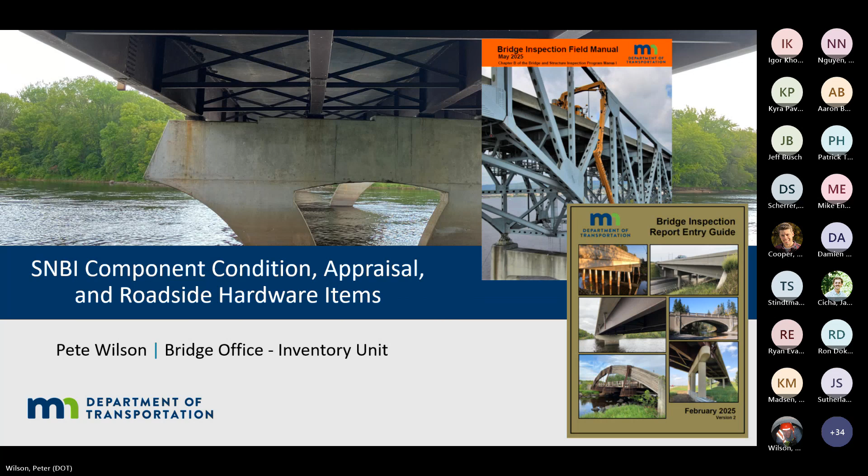So starting with the SNBI component condition ratings, obviously that's the big change this year as far as bridge inspection. We're going to be retaining the 5 original NBI ratings we've been using since the 70s, but there will be some revisions to those, and we'll go over those. In addition to those, this year with the SNBI, there are now 6 new items that have to be rated during routine inspections. So obviously a lot more work.

They won't have an initial rating, but some of them will have some notes in there, so you can use those hopefully to help you rate those items. In addition to those 6, there are these other 2 items. These items are not included in our manual. They're calculated automatically, and they'll be displayed on the inventory and inspection reports.

Essentially this is to replace an old item that was called structurally deficient in the old system. They did away with that term, and that's been replaced by just a good, fair, poor designation. That'll be displayed right on the top of your inventory inspection reports, and it's going to be based on the lowest of the main SNBI ratings, the deck, super, sub, or culvert.

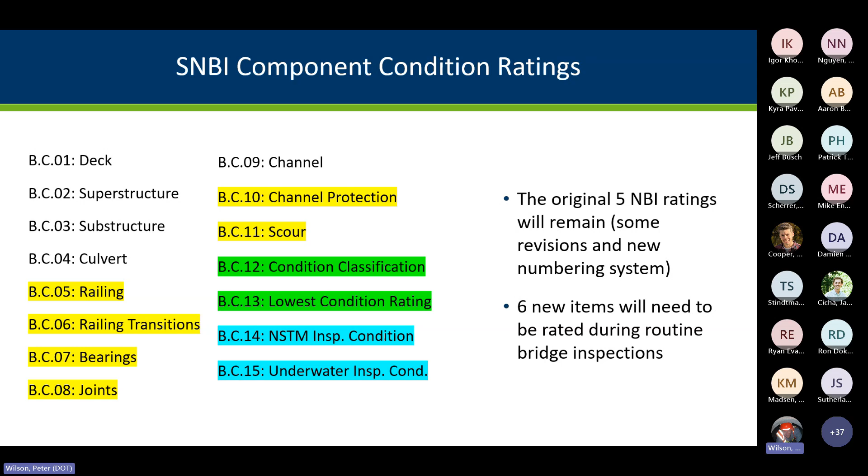And then the final items are what we call the NSTM, used to be fracture critical, and the underwater inspection condition ratings. These are included in the inspection manual, but they're not going to be rated during routine inspections. They're only done during those in-depth inspections, and those are essentially set up to establish the frequency for those inspections.

Now, if you have a bridge inspection manual, on page B8 there's a general table for the SNBI component ratings. One of the reasons Federal Highway revised these, they really wanted these component ratings to correlate better with the element condition ratings we've been using since the 90s. So they adopted a 4-level defect system that they took directly from the AASHTO Manual for Bridge Element Inspection. One of the changes, instead of using the condition state numbers, they decided to name each defect level.

This shows how they relate. The first ones are the inherent defects, and those correlate with condition state 1, and some examples would include a shrinkage crack in concrete or a rolling defect on a steel member. The next one up would be minor defects, and those correlate with condition state 2 of the elements. That's when deterioration is initiated but is not yet significant. Examples might include light leaching cracks in concrete, surface corrosion in steel, surface checks in timber.

Moving on from that is the moderate defects, and those correlate with condition state 3 in the element system. That would be a defect that is more significant than minor, but the strength of the component is not yet reduced. Some examples include, say, spalling with exposed rebar in concrete, flaking rust on steel, or decay in timber. And then finally, of course, we have the severe defects, which correlate with the condition state 4 defects in the element system. And that would include, say, severe section loss at a steel beam or crushing of a timber pile.

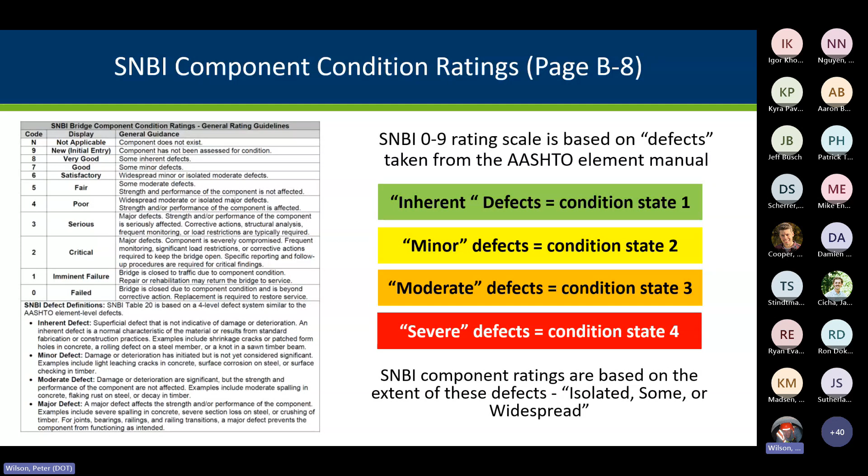In addition to that, if you also see on page B8, we also have some terminology they use to describe the extent of those defects, and that is either isolated, some, or widespread. These are obviously pretty subjective terms, and they don't define them really well in the SNBI. What they do say is that a defect is considered widespread when it is present in many separate areas, where an isolated defect would be in only one or a few locations. And then the word some is just whenever it's more than isolated and less than widespread. So again, pretty subjective and vague, but that's what they use in this table.

Anyway, if you ever looked at this SNBI manual, the component rating guidance is spread out in 20 tables over about 47 pages. We decided that was not a great way to use in the field. So what we've done is we've merged that SNBI guidance into a one-page table for each item, and kind of use the same format we've been using for several years here in our manuals. And so instead of having those 47 pages, we've knocked that down to 15 pages.

The SNBI copied those defect tables right from the AASHTO manual. And so like AASHTO, there's very detailed guidance for minor and moderate defects, the condition states 2 and 3, but very minimal guidance for inherent or major defects. So that's one thing we tried to expand a little bit, tried to give a little bit more definition of inherent and major, but we can't describe every possible defect in a one-page table. They're not perfect. So we do appreciate any feedback we can get to improve these. We'll probably be putting out another field manual in 2 years. So, as you use this, try to give us some feedback. If we don't hear from you, we'll never be able to fix it.

Another big change to the table this year is for condition state 9. That used to be just for new condition. Now it's changed to that component has not been assessed. So that's what we enter for a new bridge or for these new items as they come in. And so after you look at it, if there's not an issue, you're supposed to move those to an 8. If you've already done some entry work in SIMS, you'll realize that there's a system that will catch those, and so they won't allow you to submit that report until you change those all to a condition state 8 or lower.

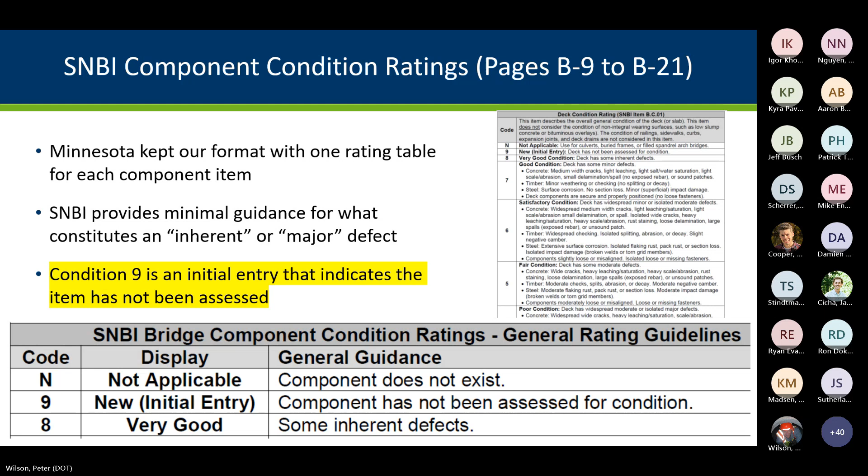Now I want to go over some of the revisions, starting with the deck condition item. The big change to this one is that in the SNBI, the deck rating does not consider the condition of non-integral wearing surfaces. That would include, say, a low slump overlay, bituminous overlay, epoxy chip seal. In our state, we've always considered that wearing surface in the condition rating. It's always been a primary consideration for rehabilitation projects, so it's not a change we liked. But just be aware of that. Also, since the SNBI doesn't have an overlay item, our wearing surface element 510 is really the only way to track the condition of overlays now.

For bare concrete decks or decks poured to finish grade, say without an overlay, that top surface condition is considered. So that does make for some confusion. There are 2 different ways you can rate these, and we have nearly 7,000 bridges with concrete decks or slabs, and so that means half of them are going to be rated one way, just by the underside, where the other half are going to be rated using both the top and bottom, depending on how those are constructed.

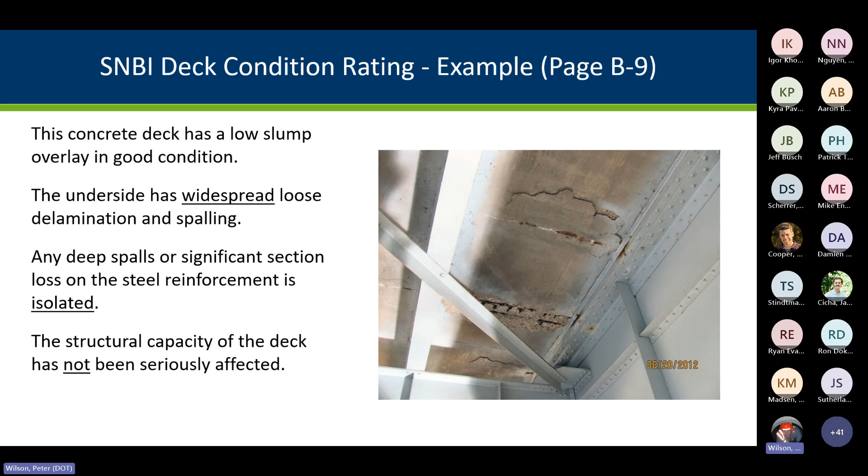And I really thought this would be an easy question, but people had a really hard time with this one. So I kind of want to run through it. So this is the way we described it. Again, we got a low slump overlay, good condition. Underside has widespread loose delamination and spalling. They mentioned that any significant section loss at steel reinforcement is isolated, and the structural capacity of the deck has not been seriously affected. Now, here's the table that we have for this.

In this case, I just included condition states 3 through 6, otherwise it gets too small in here, and I kind of limited it to the concrete defects. But if you look at this, just consider, how do you think this deck should be rated? First off, this new rating does not consider the overlay condition, so we can kind of disregard the overlay condition. We're only looking at the underside for a deck because that's a low slump overlay, so it's non-integral.

Also, since the structural capacity is not seriously reduced, we can eliminate condition state 3. So that leaves condition states 4, 5, and 6 that we want to look at here. The way we do it, spalling with exposed rebar, loose delaminations, those are considered to be moderate defects, both in our element rating tables and in this one. Whereas a deep spall or exposed reinforcement with significant section loss, those are major defects. And the way this was described, the deck has widespread moderate defects and isolated major defects.

So based on that, which one of these is the best fit? And the way we looked at it is this lines up really well with a 4. And again, we use the language right out of the manual to go with that. During our refresher training, only 58% of the people rated this a 4, which I thought was pretty low. We do give a kind of a tolerance. We give partial credit for condition states 3 or 5, but we had about 28% of the people rate this deck as a condition state 6, satisfactory, which we thought was way too high, and they received no credit.

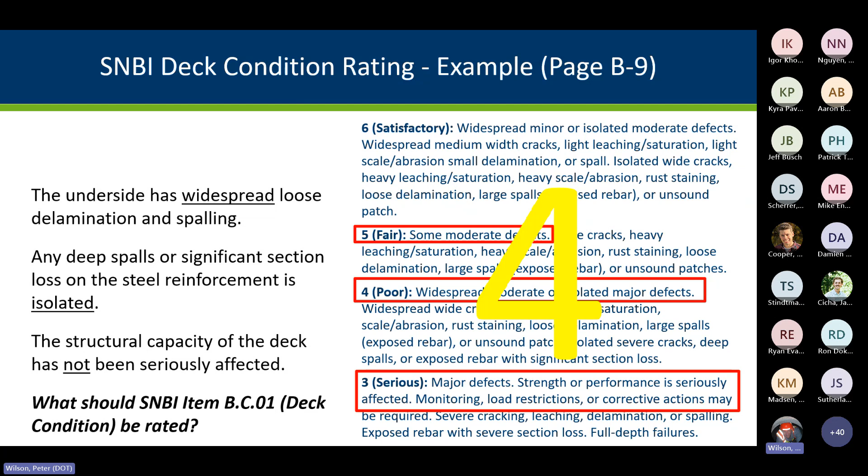Moving on, we'll just talk about the superstructure. There are a couple revisions to this that might cause a previous rating to go up or down one level. It'll be a lot easier if you have good notes explaining your NBI condition ratings. Under the SNBI, condition state 7 is no section loss on primary steel members. In our old system, I think minor section loss was a 7. So we are going to have some bridges that are going to drop from a 7 to a 6 just due to the isolated minor section loss. Hard to find a steel bridge out there that doesn't have some minor section loss on it. So that might have some impact.

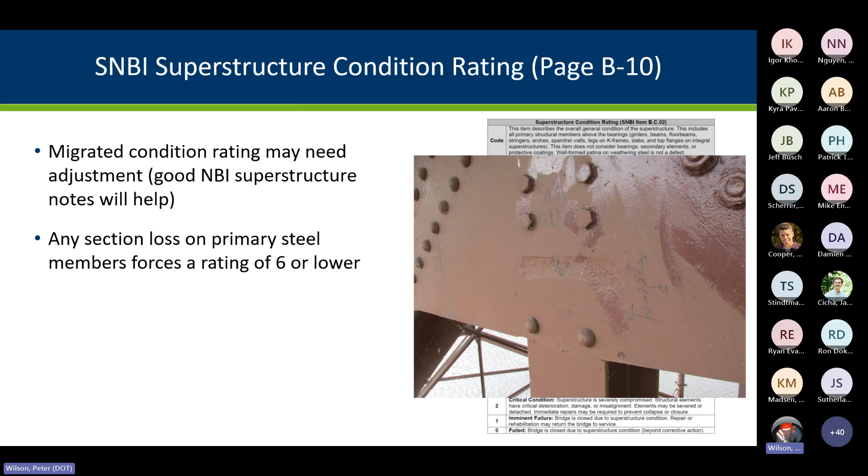Also, shear cracking. In our old manual, we had structural cracks may be present as condition state 5. That was based on the old coding guide, where the first mention of cracking was down at condition state 5. So we felt we couldn't do it higher than that. But in the new SNBI, we can allow some higher ratings for shear cracks if it's isolated or minor. So that is a change there. So if you had moved it down, you could move that back up if that's just isolated.

And the other change is for bearings. Those are now rated under a separate SNBI item. So for bearings, if you did have a superstructure that was marked down due to bearing issues that didn't impact the rest of the superstructure, you could raise that rating up.

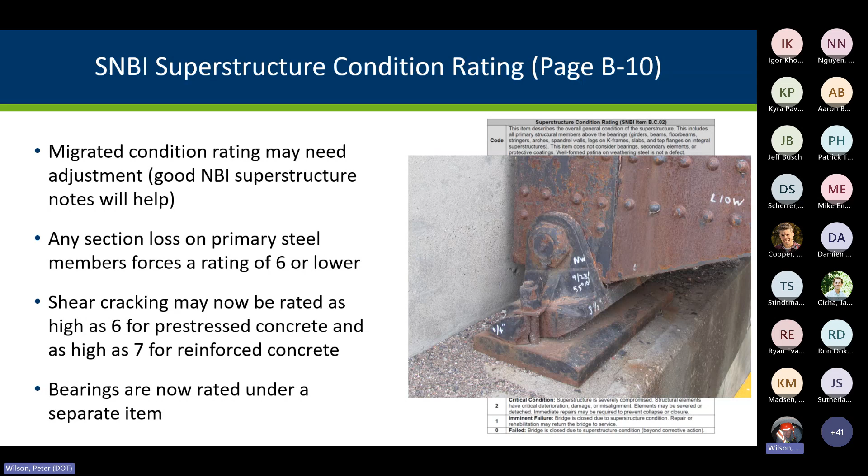And so this is another example here. This is a question from the refresher test. And again, we described it using the same verbiage right out of the table, so we hope most people get this right. We described what you see on the left of the screen, with the flaking rust along the bottom flange, significant section loss in some critical stress areas. We did make the note that the structural capacity is slightly reduced, but not seriously affected.

So looking at the table we just included, in this case I'm just showing condition states 3 through 6 from page B10. What would you rate that? There are a couple ways of looking at it. First off, looking at the defects. Flaking rust indicates some section loss. Section loss is a moderate defect.

So in this case, the superstructure has widespread moderate defects with significant section loss in some critical stress areas. So looking at that, condition state 4 probably fits that the best. We also said in here that the structural capacity is slightly reduced but not seriously affected. And that kind of rules out condition state 5, which is strength and performance are not affected.

Whereas condition state 3 also would be eliminated because there the performance is seriously affected. So again, using both criteria, it would end up with a condition state 4 for the rating. And in our test, 90% of the people did have that rated 4, which is pretty good. But I think we had 5% rate it condition state 6, satisfactory, and got no credit. So that was a little disappointing. I think people should have been a little closer on that one.

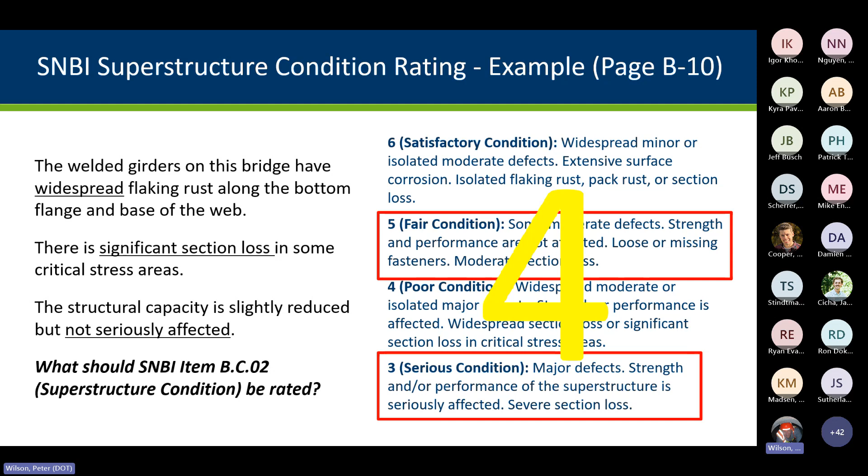Moving on to the substructure. The main revision to this is related to shear and flexure again, where we've made that same change that we did for superstructure. Structural cracking is pretty common on concrete pier caps, and with our old guidance, we had a lot of bridges that were rated down to condition 5 due to shear cracking in those caps. While this is a concern, there are instances where, if that's minor or isolated, we felt that condition state 5 would be too low, so you could raise that up in those situations.

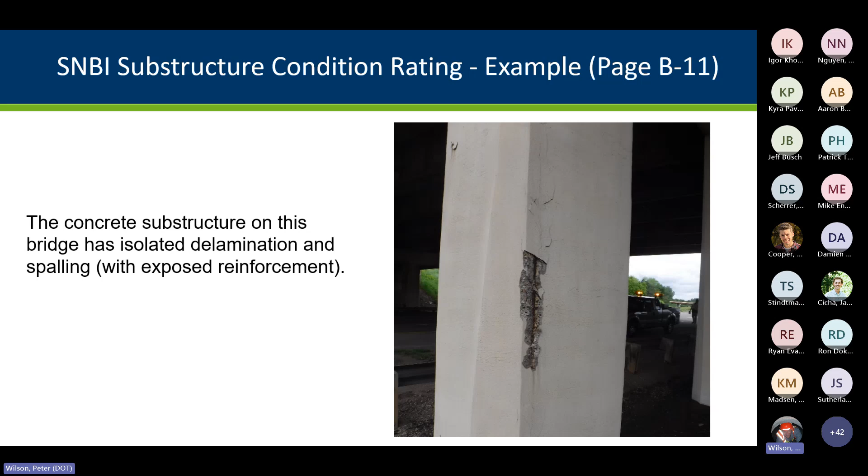And here's a rating example, again, based on our refresher test. In this case, we had just a simple statement that we had some isolated delamination and spalling with exposed reinforcement. So looking at the guidance on page B11 in the manual for substructure, it shows condition states 4, 5, 6, and 7. First off, condition state 7 says no exposed rebar. We had some exposed rebar, so we could rule that one out.

Spalling is considered to be a moderate defect. This spalling we said was isolated, so for sure we can get rid of the poor condition since it's not widespread. So we're down to the other two options, which are widespread minor or isolated moderate defects, or some moderate defects. And again, these are very subjective terms. But in this case, we said right out that it's isolated. So the answer in this case should have been a 6.

We had about 77% of inspectors rate this condition 6, but we did have some people rate this condition state 4 and get no credit. Isolated spalling, I don't think that should be knocked down to a 4 for poor condition.

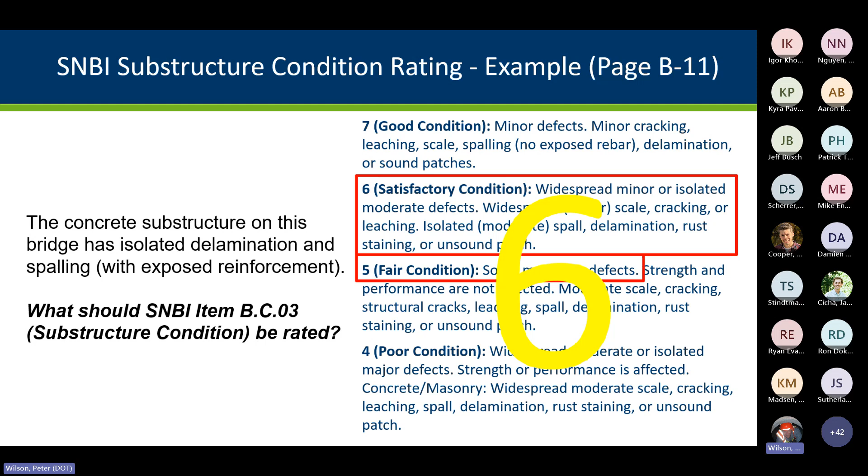Moving on to the culvert condition rating. This table is worded differently than the old table in our system, but they're close enough that migrated ratings should not need much adjustment, if any. And I also want to point out that these SNBI defects correlate really straight on with the element level defects. For instance, for a concrete culvert, the defect descriptions in the SNBI table on page B12 are going to correlate with the element ratings, and that's, I think, on page B180.

So, for instance, light leaching is a minor defect. Heavy leaching is a moderate defect. Also for spalling, a small, shallow spall without exposed rebar is going to be a minor defect. Spalling with exposed rebar is going to put you up to moderate. And if that spall is deeper than 4 inches or the rebar has severe section loss, that's going to be categorized as a severe defect.

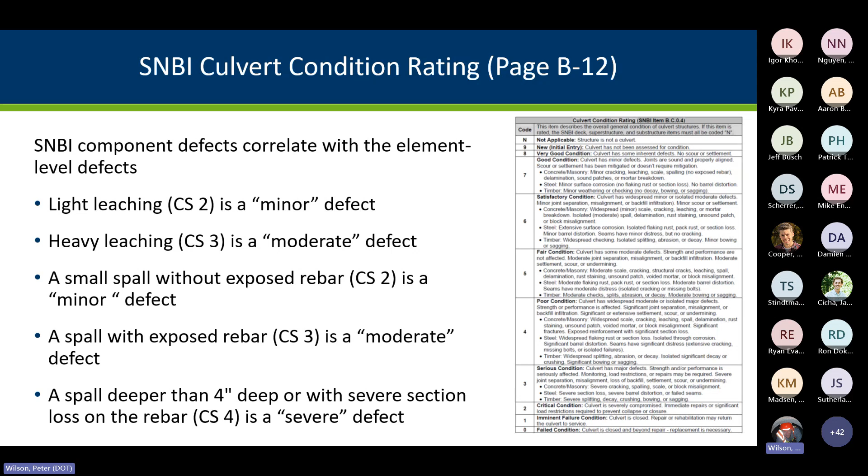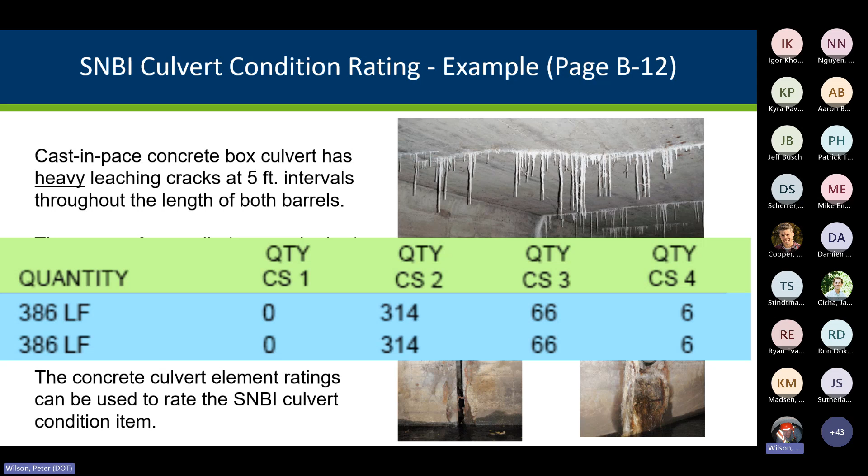And just a reminder that when you rate this culvert, you've already gone through and rated the concrete culvert element, and those should already describe the extent and severity of these defects. So if we pull up the current culvert element ratings, we have about 81% rated as CS2, minor defects, about 17% rated condition state 3, moderate defects, and a small amount, about 2%, rated CS4, major defects. In the element notes, it explains that the 6 linear feet of condition state 4 is due to spalling at joints deeper than 4 inches. So as we apply those to the culvert component rating on page B12, we can run through and look at how those are rated.

So first off, looking at the defects, based on those element ratings, we're going to have some widespread minor defects, some moderate defects, and isolated major defects. And looking at the tables, none of these are a perfect match. But since condition states 5 and 6 say no major defects, condition state 4 is probably the best answer there as far as how to rate this culvert. Again, that's based on the defects.

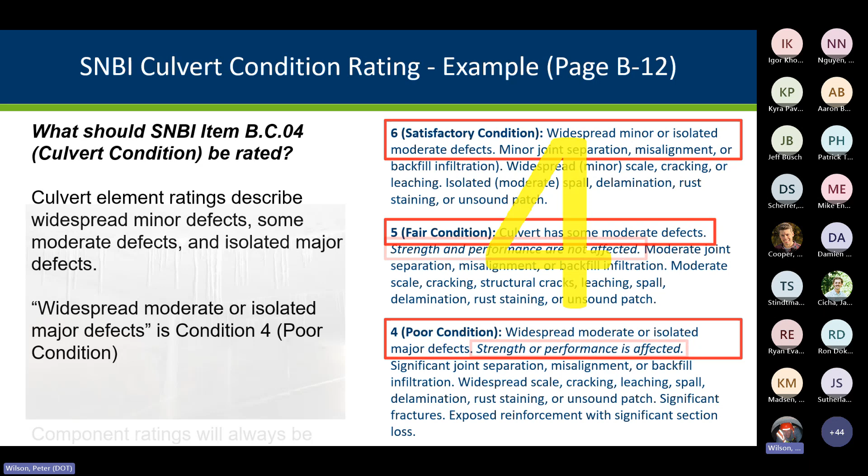Keep in mind that these tables do have other criteria just beyond the defects. One of those is strength and performance. And so again, based on the defects, 4 is the best answer there. But we also have another criteria here, and that's strength and performance. And this is why it can be kind of subjective. In this case, condition state 5 says that strength and performance are not affected. Condition state 4 says strength or performance is affected.

And in the case of this specific culvert, we had the same issue with the older tables that we used prior to this. They had kind of the same criteria as well. They have these different criteria, but they don't really say which one should govern. And so, lowering an NBI rating from a 5 to a 4 has a lot of impacts on your BPI, LPI, the inspection interval, things like that. So people are kind of hesitant sometimes to drop something from a 5 to a 4, or they maybe want to raise it from a 4 to a 5.

In this case, the inspectors back in 2019 lowered this culvert rating to a condition state 4. And then during the subsequent inspection 2 years later, the PA reviewed it and determined that the structural capacity of the culvert was not reduced. And in that case, they decided to raise it up to a 5 the following inspection. And that is one of the reasons we do allow a tolerance of plus or minus 1 for component ratings. So there is some subjectivity to it.

Just to point out that in the proposed metrics, Federal Highway is saying they're not going to allow any tolerance between conditions 4 and 5. And I think that's totally unrealistic. But it's also why it's important to have really good notes to explain your component ratings, especially when they start to get lower down in the system. In the case of this culvert, they had excellent notes to explain why they'd adjust that rating up from a 4 to a 5. And in this case, I would say that either of those, depending on which you use, would be correct, 4 or 5. And that's again why we have that tolerance we allow.

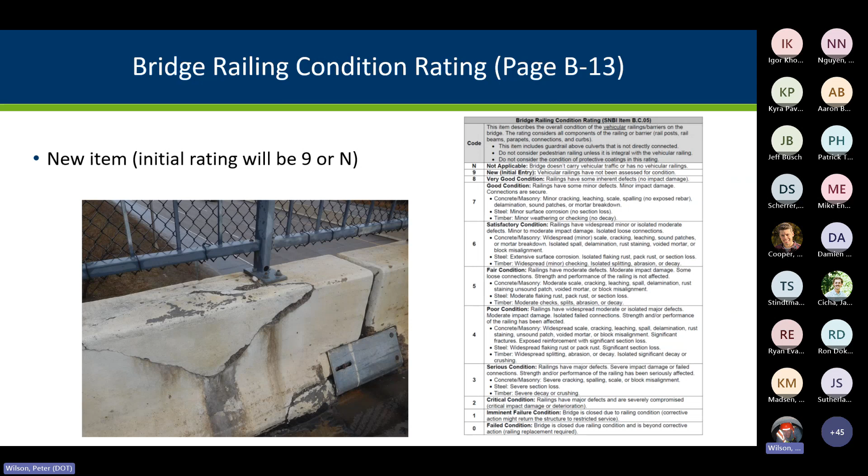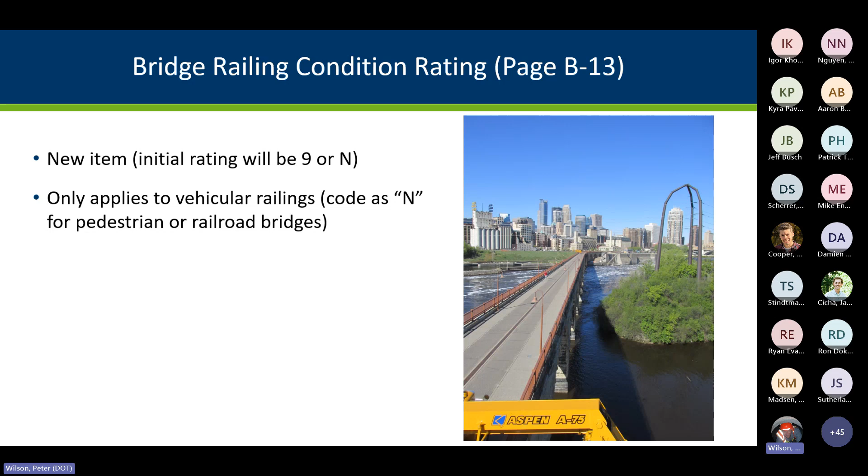If you have a railing like this, where there's a concrete barrier with a steel railing mounted at the top, where the steel railing is really more for pedestrians, since those are integral and tied together, you would consider the damage to that upper railing in this rating. You do not consider the condition of protective coatings. Corrosion can mark it down, but just fading or chalking or peeling of a paint layer or galvanizing is not going to impact that rating. And this does not impact your inspection intervals. So if it does get dropped down really low, it's not going to force you into a 12-month inspection interval.

So here's kind of a rating. This is actually from Scott Tyson's presentation at the training this year. This bridge has its original railings from back from 1966. This is what we call our MnDOT rail type 14. It's a one-line concrete base that has a two-line upper steel pipe. There's also a tension cable that runs kind of below the horizontal concrete there that goes through the rail posts that ties everything together.

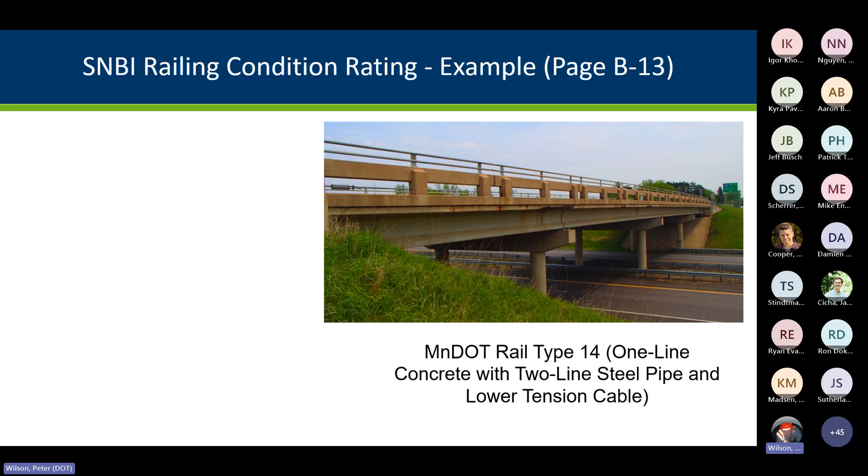Keep in mind that this new coding item doesn't have any sort of migrated railing or notes, but the railing condition has always been documented and rated under the railing element, so you can look at your notes and your ratings for that element when you're rating this item. It can help ballpark you in. There wasn't a way for us to do this automatically because it was just too messy with the multiple elements you might have, but you can at least take a look at those.

Combination railings are rated under more than one rail element. In this case, it's concrete and steel, so you have a concrete element, and these are the concrete ratings. We can see we're mainly condition state 2 with about 10% at condition state 3, with nothing rated condition state 4. The steel portions of the railing are in better shape, and these are the current element ratings for the steel element, mainly condition state 1 with a little condition state 2.

Based on those element ratings, you could say that we've got some moderate defects with a condition state 3. So because of that, if you look at the SNBI rating, I think if you have moderate defects, it has to be rated condition state 6 or lower. So as we go through the rating here, we'll only look at 6 or less.

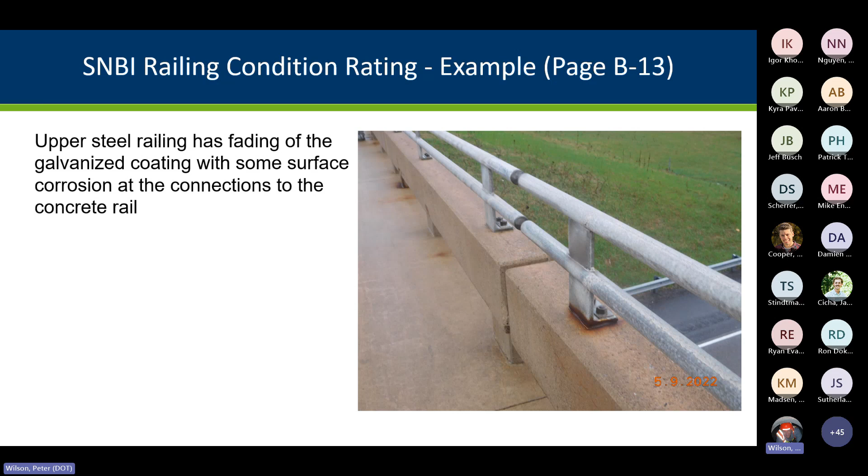But anyway, here's some photos of the railing. The upper pipes have some fading of the galvanized coating, but we don't consider that in this rating. We're only concerned about corrosion or section loss. And you can see there's some surface corrosion maybe down at these connections, but nothing really significant. The lower tension cable has some coating failure and surface corrosion, but again, nothing that would rate it down to a 3 or lower.

The concrete posts and beams have some map cracking, rust stains, and spalls with exposed reinforcement. It's kind of a subjective thing, but we said that the spalling is not severe and does not yet impact the strength of the railing. So looking at condition states 4, 5, and 6, here are the codes that come from page B13. We have no major defect on this railing, and the strength of the railing has not been reduced. So that probably rules out condition state 4, but we still need to look at the extent of those moderate defects.

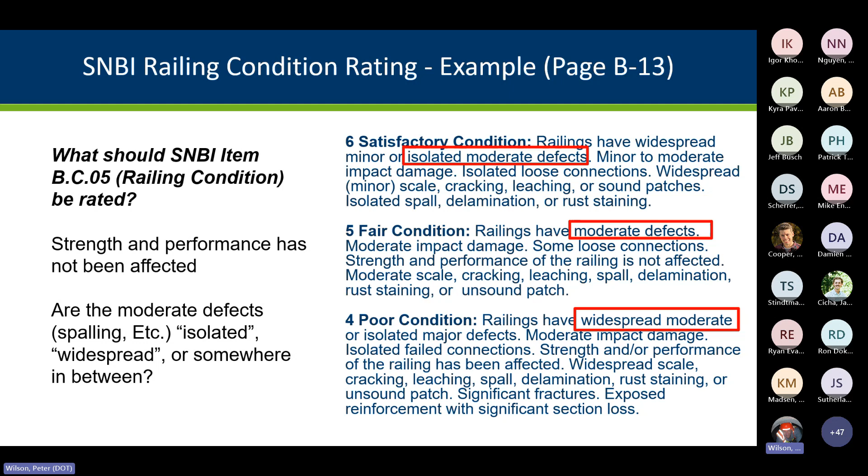So looking at those, condition state 6 is isolated moderate defects, 5 is moderate defects, and 4 is widespread moderate defects. This concrete railing had about 10% rated 3 due to spalling and other defects. I would not consider that necessarily to be widespread, but I think it's more than isolated. So Scott and I both thought that a condition state 5 was probably the appropriate rating for this railing.

Another new item that we have this year is the railing transition rating. This is a brand new item we've never rated under an element or anything else before. On a typical bridge, this will include the end post and about 20 to 25 feet of guardrail at all 4 corners. In this case, it's kind of hard to tell where it stops. It's probably going to go to the end of that approach panel where that lower rub rail goes. This does not include the terminals or anything beyond that transition zone, but it will include the post and the connection.

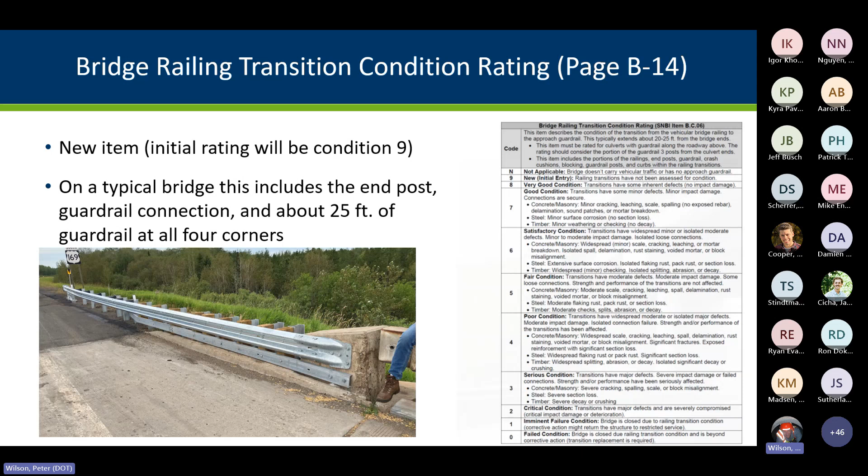Just want to point out this item only applies to the railings on the bridge, not transitions protecting the substructure. If you do have damage down below to this guardrail, we have guardrail element 893 you could use for that. Again, this only applies to vehicular railing transitions, so it's going to be coded N for pedestrian and railroad bridges. And if there's no approach guardrail at all, you're just going to code this as N.

And this was actually kind of a trick question on the training test. We had that on there: what should this be rated? And of course, it should be N. I think about 6% of the people actually provided a rating for it, even though it doesn't exist.

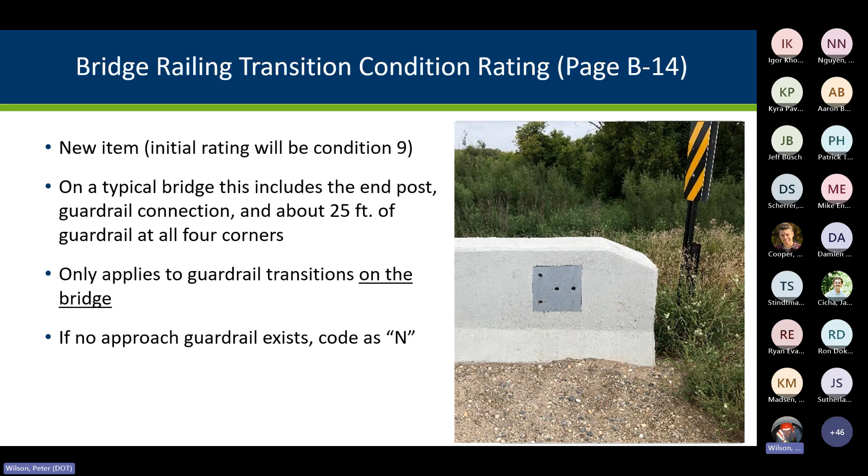And again, this one does not impact inspection intervals. So even if you have some severe conditions on there, it's not going to knock down your required routine inspection interval. So here's a rating example for this.

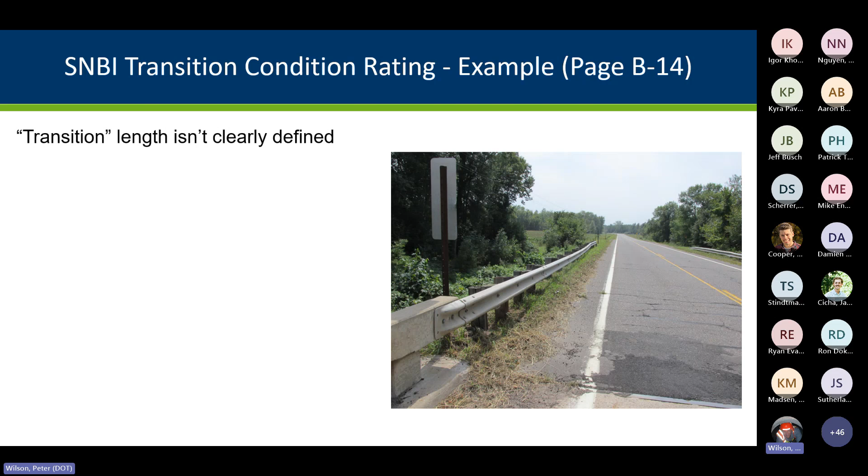In this particular one, the limits of the transition area are not really clearly defined. Like again, we estimate about 20 to 25 feet from the end of the bridge. You could look at your notes for element 893 guardrail, but that rating's probably not going to help you because that's just a one each item, and you don't know if that was rated down for things beyond the range of that transition zone.

Here are some close-up photos of this particular transition. This was a bridge that was constructed back in the 60s, but the approach guardrail wasn't installed till 1983. So by then we're using a totally different connection. We were using a 4-bolt connection, whereas the existing railing only had spaces for 2 bolts. But the bolts are in there, they're in good condition. So this item doesn't rate the adequacy, only the condition. So as long as the bolts are intact, that condition is okay.

We got some fading of the galvanized coating here. You can also see some minor plow scrapes in the plate, which isn't really considered. But in this case, any significant damage to the plate beam is beyond the transition zone. The other components we want to look at are the posts. In this case, we have at least 2 posts that are totally rotted away within the transition zone. You can see they're pretty well rotted and pretty well non-existent at this point.

So here are the coding options for this item. And again, we kind of just included the timber stuff on here because that's where we saw the biggest problems with this transition. And so where would you rate this at? For the decay on these timber posts, you have some choices of moderate, significant, or severe, and we went with severe for this one, which would go with the condition state 3.

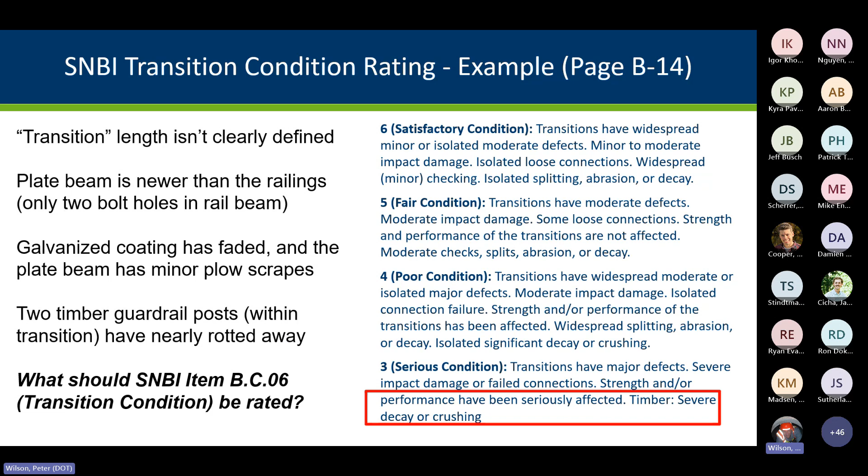If you call this significant and rated it condition state 4, I would have a hard time proving you wrong. But again, that's why your inspection notes are really critical for these new items. So we went with a 3 for this one.

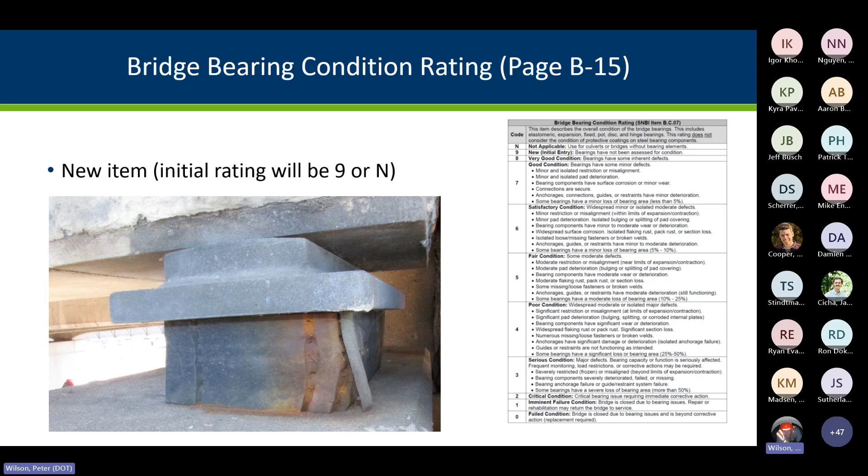Moving on, bearings now have their own component rating. We mentioned that earlier. The initial coding will be a 9 for this one. So you again have to determine what that coding should be. We have a lot of newer bridges with integral abutments where those bearings are fully encased and closed. In this case, we don't even have a bearing element. If you don't have bearings, you don't have a bearing element, you just code this as an N. Obviously for culverts, you're going to be coding this as N.

The Federal Highway does want the condition of hinge bearings, cantilever hinge bearings, to be included with this. We have at least 200 or 300 bridges, I think, in the state that have those. So keeping that in mind, those should be included. We don't consider protective coatings, just if there's corrosion or anything else on those bearings. And again, just like the other ones, this will not impact your inspection intervals for your routine inspections.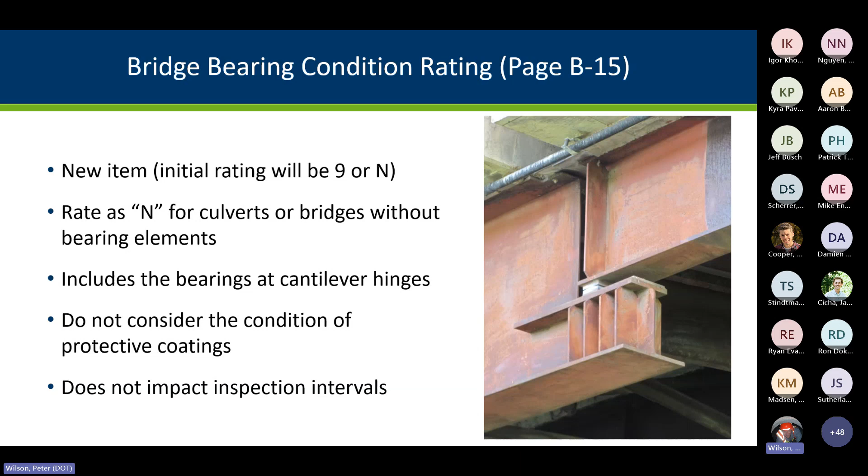And here's a rating example for this new bearing component. Elastomeric pads are generally easier to maintain than those older rocker bearings or sliding plate bearings, but one issue they do have is a tendency to walk out below the upper plate. On some of the newer ones, we put in some restraints around the edge of that upper plate to try to keep those from walking out, but you'll run across this once in a while where that pad moves out.

And here's the guidance for the bearing element for condition states 3, 4, and 5. The SNBI has very specific guidance for the loss of bearing area, and we included that in our tables. So in this case, it's based basically upon that percentage of loss of bearing area. Since we have some bearings with a loss of 30 to 40%, that correlates with condition state 4 for that item. It'll be interesting to see how this works if we run across a lot of these. So again, we appreciate feedback as you're going out and rating these new items.

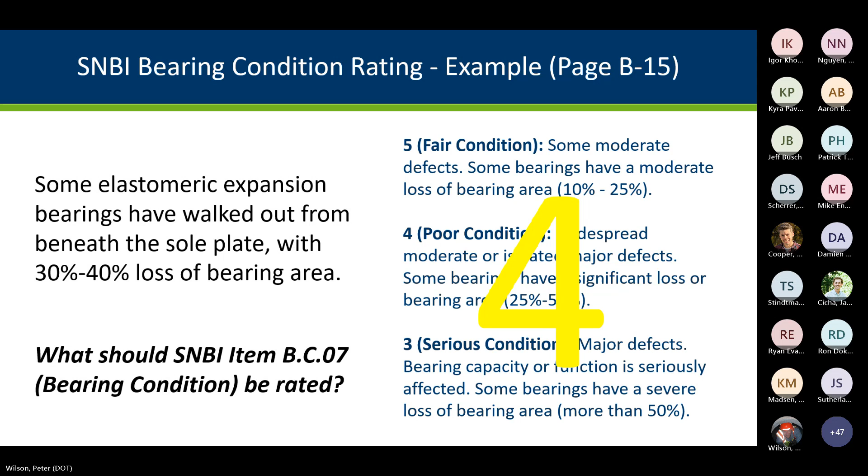The joint condition rating is also a new item and will be migrated in with a rating of 9.

One thing about this is that the SNBI, they do not want to consider the condition of poured joints that are not designed to accommodate expansion or contraction. And the vast majority of the poured joints on our bridge decks are not really designed. They're more like maybe a saw and seal joint, maybe along a center line or an end block, things like that. So a lot of our joints are not going to be considered in that if they're just that type of a saw and seal joint.

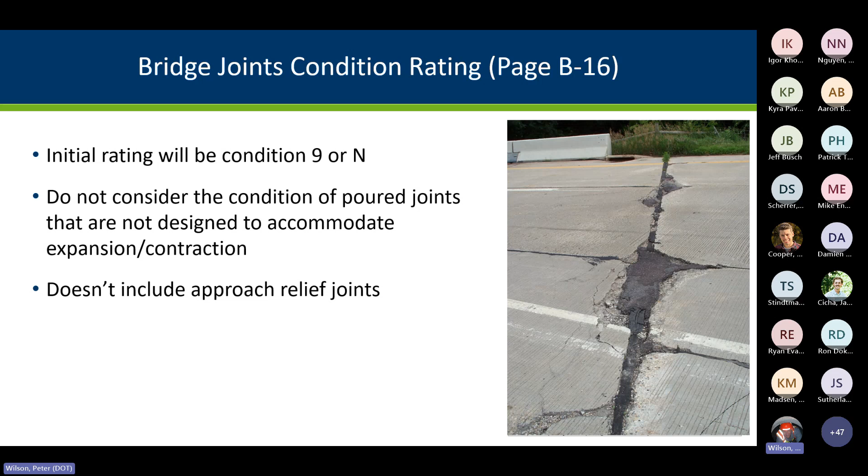Also, this does not include approach relief joints. It only includes joints that are actually on the bridge deck or right where the bridge deck ends. And in our rating system, we kind of set this up so it would identify joints that are leaking. So if you have a leakage issue, this item will be rated either 5, 3, or 1. So it kind of cuts down your rating options for those. But we really wanted to specifically identify joints that were leaking.

So here's a rating example. This is a strip seal expansion joint. In this case, it's kind of opened up, so it's nearly at the design limits. However, the gland is pulled tight, but it's still seated in the extrusion. It hasn't pulled out at all. And the joint is not leaking.

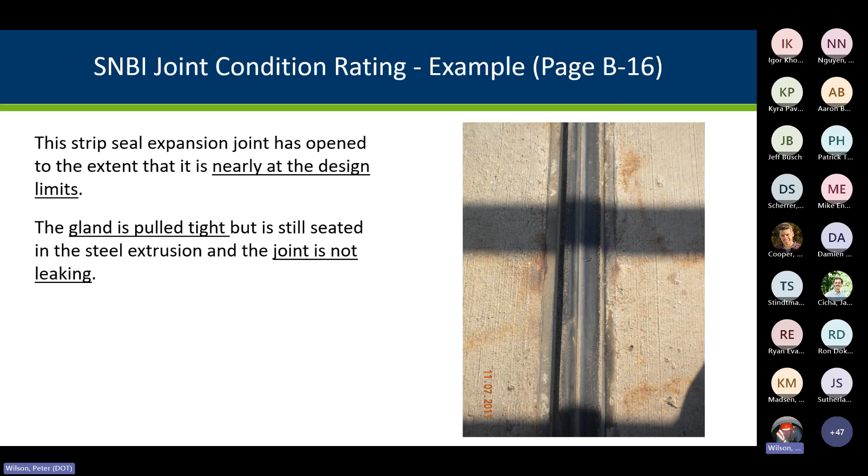So looking at the table here, and this is on page B16, we can see that since it's not leaking, we don't want to go with a 1, 3, or 5. So I only showed 2, 4, or 6. So what would be the best one for that? Now, again, the gland is pulled tight, but it hasn't pulled enough that it's actually pulled apart. So we were thinking probably the best option would be that the gaps are near the design limits. So that would lead to a condition state 4 rating for that joint.

Now moving on, the channel item, we still have this, but there are now 3 waterway items that we have to rate in addition to the channel. We'll get to those after we do this one. Anyway, this one should migrate directly and accurately from the old item. If the conditions haven't changed and your old rating was accurate, you shouldn't have to adjust it much. And those channel notes will carry over if you had any channel notes.

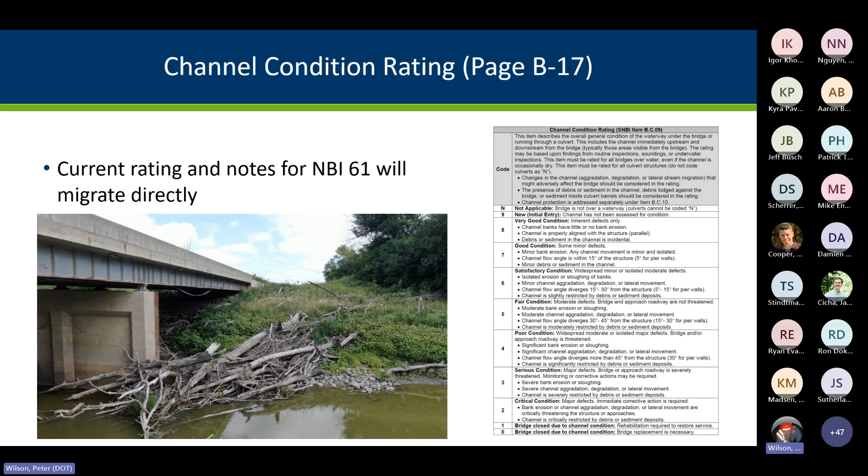Like before, this rating considers the condition of the channel right at the bridge, below the bridge, as well as upstream and downstream of the bridge. Generally, we say as far as visible from the bridge, you want to consider that in your rating.

One thing we've had added to the table is some guidance that's right out of the SNBI regarding the angle at which the channel hits the substructure. We've had some mixed feedback on this so far. Some people like this, some people do not like it. They think it's going to make the ratings harder and maybe more inaccurate. So we again appreciate feedback and opinions on this. So we'll see if we keep that in there or not. But again, we had some mixed reactions on that new guidance.

Oh, I just want to point out this item does impact routine and underwater inspection intervals. So if it does drop down, I think bridges must be 5 or higher for a 24-month routine interval, and culverts must be 6 or higher for a 48-month inspection interval.

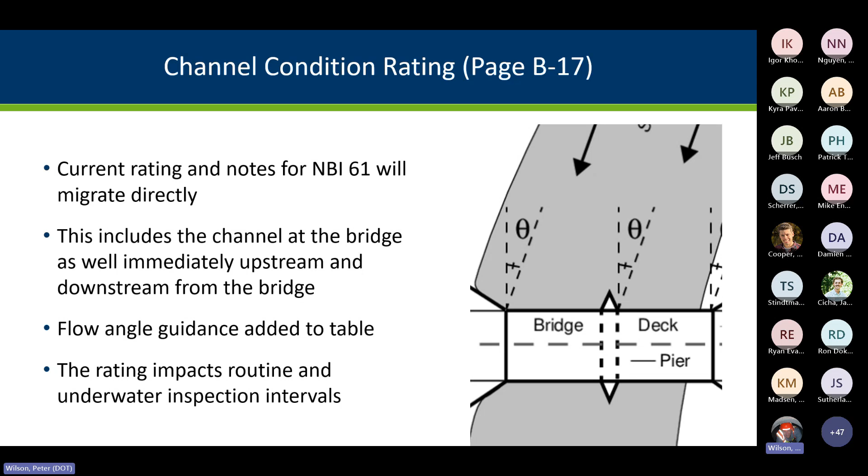So here's our rating example. This is another one that was right out of the refresher training. The table that's right in the SNBI for this item was kind of sparse, so we tried to add some more guidance, but the language is still pretty subjective, and there are a lot of things in there, and it's hard to say sometimes which guidance should govern. But we do appreciate feedback. We might be revising our table in the future.

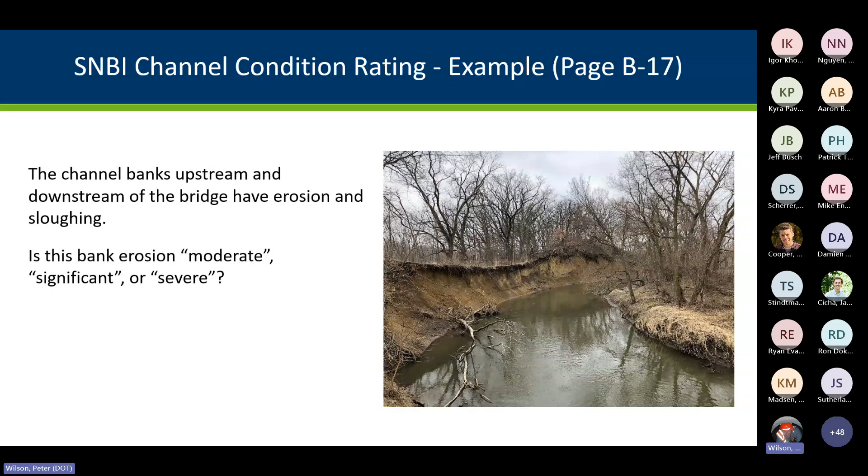So looking at this, it's going to be based on very generic terms like moderate, significant, severe. So different inspectors might look at this and give a different rating for how severe they think that bank erosion is. So again, there's our table there. Now, based solely on this, we also added this statement that assumes that the bridge and approach are not threatened. And so that's something we can use in the coding.

So that might lead you towards a slightly higher rating than if you just base it solely on that. So in this case, we did go with a 5 for this one. And I think about 88% of inspectors came up with that same rating, but all 100% of the people, I think, were within that plus or minus tolerance of 1. So even though these tables are a little bit subjective, with that tolerance, we get really close on those.

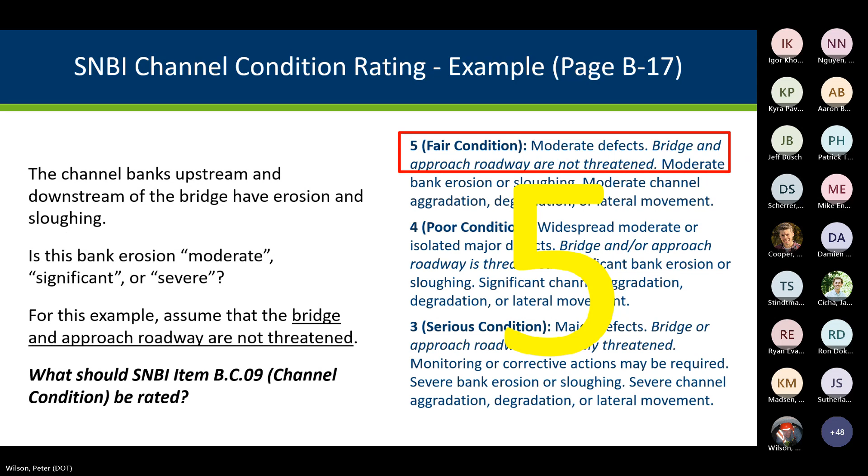Moving on, there are now 2 additional changes. One of those is channel ratings for channels, and one of those is this channel protection item that they want the protection rated separately from the channel. So obviously there is going to be some overlap between this item and the channel item. There's also going to be overlap between this and the MnDOT slope element. This will come in migrated as a 9 or an N.

But for the most part, this item should include any sort of channel or slope protection located at or below what you consider to be the high water elevation for that bridge. So wherever that highest flood level would get, any protection within that area should be rated under this item. Again, there'll be no notes coming in for that. A lot of times we don't have a lot of very good notes for the channel anyway.

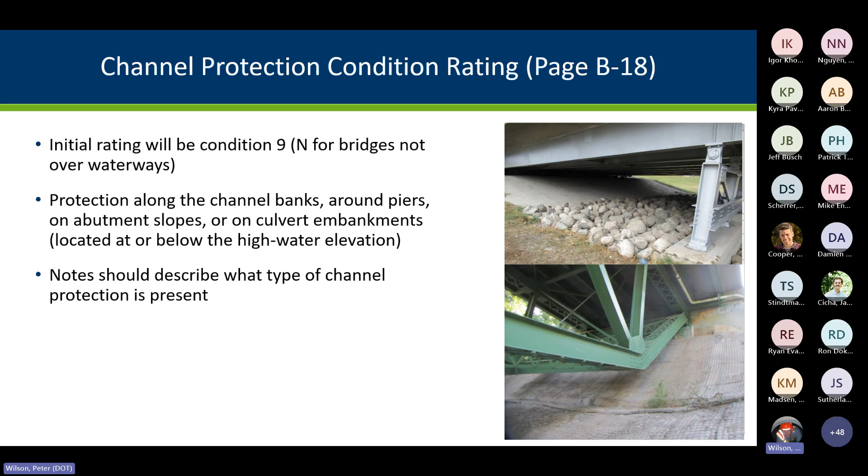So it's really important for you to get out there and at least describe the type of channel or slope protection that's present. It's a good idea, it's something you can compare to see what's shown in the original plans. For culverts, keep in mind for this item, they must be rated 6 or higher to keep that 48-month inspection interval. So if you do rate this down, you might lose that 48-month cycle. You might go back to the 24, the 2-year cycle for those culverts.

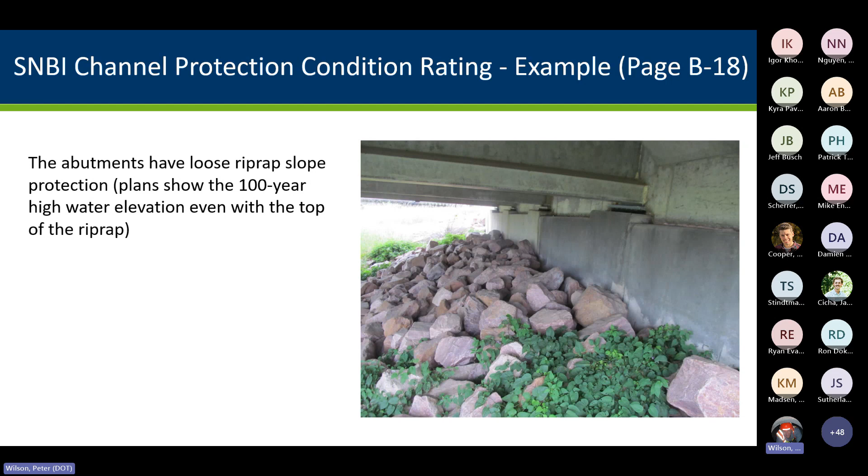So here's kind of an example here. This is a bridge that's about 20 years old. The plans show the high water elevation even at the top of the slope. So all this riprap should be considered in the rating of this item. All the riprap appears to be in place, but in some locations here, you can see where that riprap has settled maybe slightly from where it originally was placed. You can see from where the special surface treatment was put on initially when that bridge was first constructed.

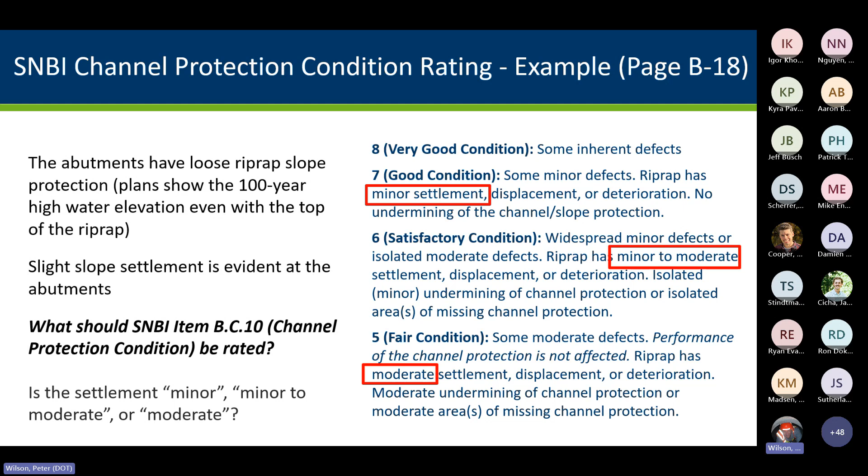So looking at the condition ratings here, we just included condition states 5, 6, 7, and 8. And so looking at this, we do have some settlement here. Would you call that settlement minor, inherent, moderate, minor to moderate? Again, rather subjective terms, but in this case, we felt that minor was probably the best way to describe it. So we went with the condition state 7 for this one.

And the final new SNBI condition item that we have to rate during routine inspections is the scour item. This must be rated for all bridges over water. This includes culverts. We used to have an old scour item that didn't include culverts, but you do have to rate it for all culvert structures.

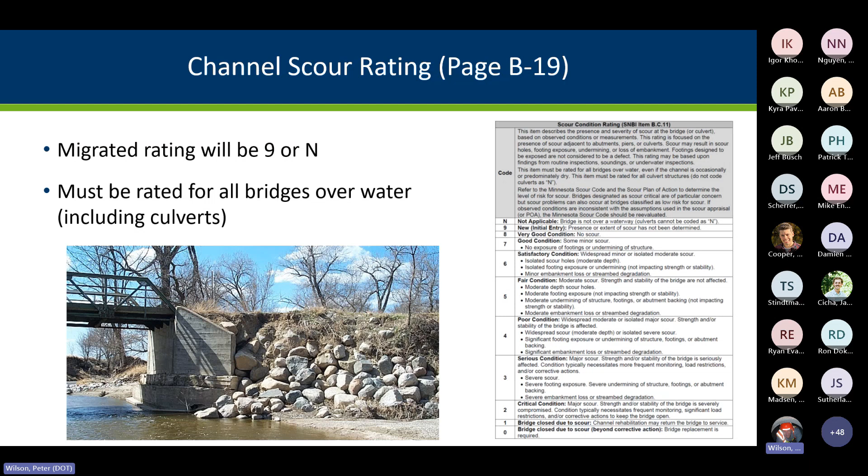Again, element 885 scour is no longer being used. We haven't deleted it from all the reports. It's still in there. So the notes should hopefully migrate that over. But once you rate this new item, you can go ahead and delete element 885 from your inspection report. We'll probably have to go through after the next round of inspections and start deleting that one out. But that one will eventually disappear as soon as we get that deleted, either from the inspectors or from our unit doing it.

Keep in mind that for this item, a rating of 3 will impact both routine and underwater inspection intervals. So if it does get really bad, that will knock those down. And also keep in mind, if your bridge has had an underwater inspection within the last year, because we started last year at this time rating these three waterway items as part of those underwater inspections, these items might already have been rated for you.

So you're just going to have to look at them and see if anything's changed since that last rating. I probably wouldn't change the scour rating from what the underwater inspection says unless conditions have really worsened or scour countermeasures maybe have been installed to correct a problem.

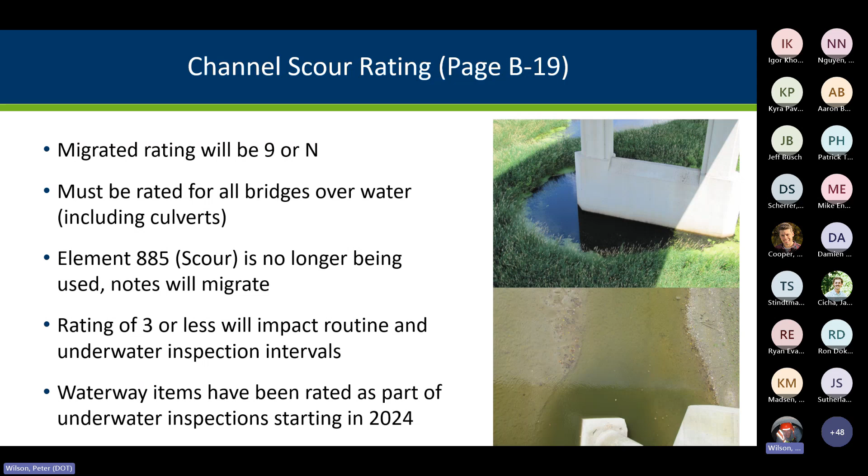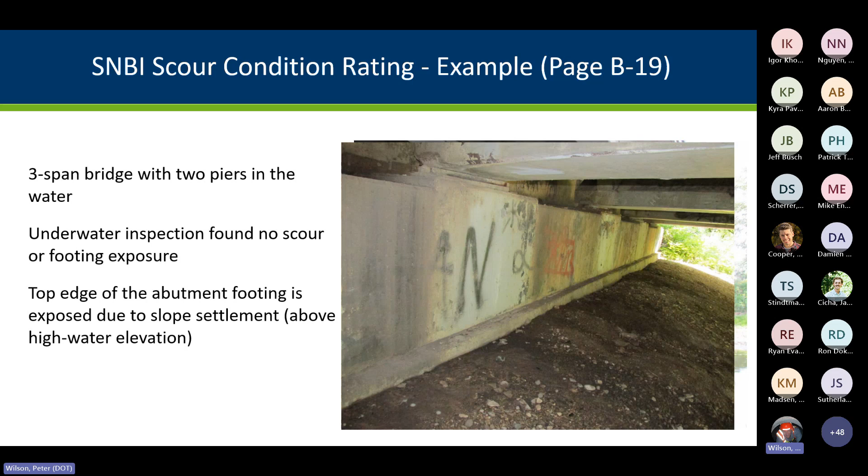So here's some condition ratings from the table from B-19. Here we included condition states 5 up through 8. And keep in mind the rating cannot be left at 9. You do have to rate that lower. Now in this case, we went with a condition state 8 because there really wasn't any observed scour that would constitute rating it lower than that. Again, what we saw up there in the abutment was really not due to that, so we

took that out. Bridge scour, the way it's defined, is the erosion of stream bed material or bank material around piers and abutments due to flowing water. If you're being really picky, you could almost argue that no bridge over water should be coded as 8, no scour, because you might have a little bit, but again, we felt in this case it was so negligible that we left it at a condition state 8.

Now, before we move on to some other items, I just want to summarize the impact of these SNBI component ratings on other items. In Minnesota, we've always considered an NBI deck, super, sub, or culvert item rated as condition 2 to be a critical finding. The NBIS has now made this official, but they've also included a couple of new items. They've included the scour and the NSTM or fracture critical item also. So you could conceivably have a critical finding on some other component, but these are the only ones that we're going to query and will automatically consider to be a critical finding if you have any of these items rated 2 or less.

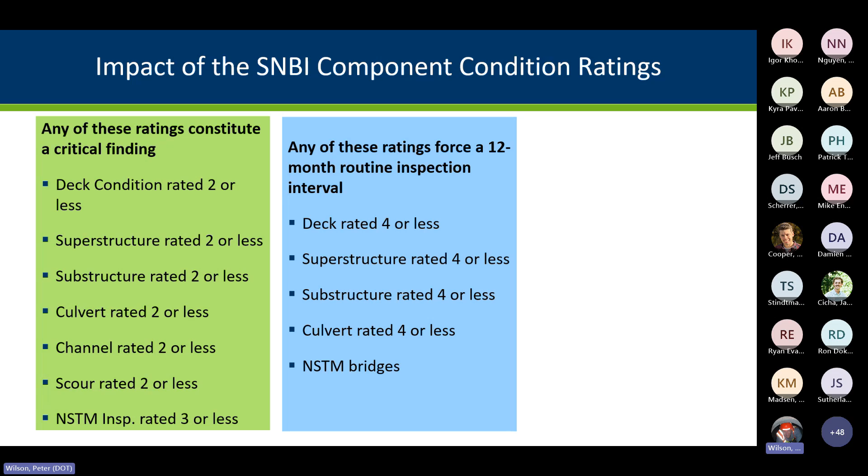For 12-month inspection cycles, we've always required a 12-month inspection cycle if an NBI rating was rated 4 or less. The NBIS did not tie inspection intervals to condition until the last revision. But they did now create rules for this. They actually have a slightly different one. They say anything that's 3 or less, but we decided to keep our stricter requirement of condition state 4 or less. We still have a requirement for a 12-month inspection interval for NSTM bridges, regardless of condition. The new item that comes through with the NBIS is that scour item we mentioned earlier. If that one is rated 3 or less, that will force a 12-month inspection interval.

And then the other one is the 24 and 48 month. For a 48-month inspection for culverts, the culvert has to be rated 6 or higher, channel has to be 6 or higher, and channel protection needs to be 6 or higher. And also the scour item. So if any of those items drop, you're going to lose that 48-month cycle that you have for culverts. In our state, we do limit this so only culvert structures can qualify for that 48-month, and that's in our state statute, so we can't include other structures at this point until we revise

our state statute. And the other thing I want to point out is that the channel protection item of 5 or less is only going to apply to NBIS structures. So if you have smaller culverts in that 10 to 20 range, that won't impact that 48-month cycle.

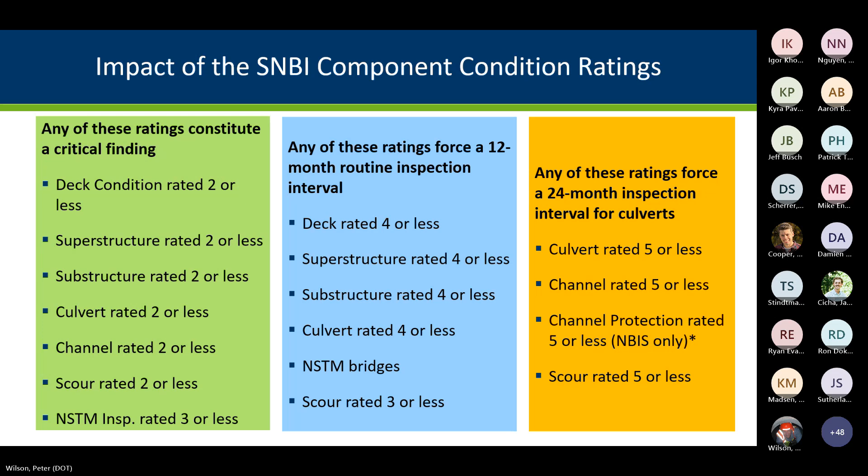I just want to talk briefly about the new appraisal ratings. These are ratings that we do want you to review during your next inspection cycle. Once they're reviewed and rated, they should rarely change. The first one is the approach appraisal rating. This replaces the old NBI item 70. It has a simple good, fair, poor rating instead of the old 0 to 9 scale. We will migrate a good, fair, poor rating based on that 0 to 9 scale, but it's only going to be as accurate as the old rating was.

This only applies to vehicular roadways and only applies to the roadway above a bridge or culvert. So if you have a pedestrian or railroad bridge, that's going to be coded as N, and it's going to be based again on sight distance alignment issues that result in a speed reduction for that bridge.

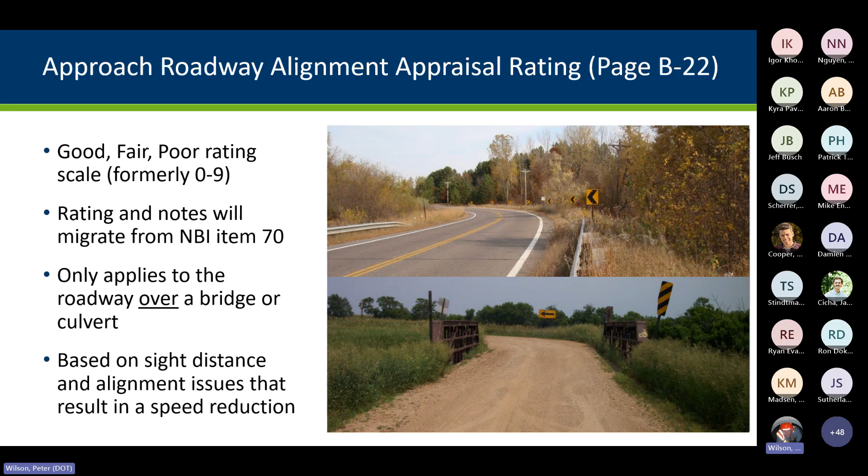And then the other appraisal rating is called overtopping likelihood. This replaces old item 71, which was waterway adequacy. This one, they changed it around quite a bit. They went to a 0 to 6 rating instead of the old 0 through 9 rating. They also flipped the scale around. So unlike all the other items, for this one 6 is the worst condition instead of being the best.

Again, we will migrate a rating for this, but it might need adjustment. This rating used to include a few different things besides the roadway classification, the potential traffic delays. Now it's based solely on just the frequency of overtopping. This is a hard item to rate if you don't know the flooding history, but we do want you to give a stab at it and try to do your rating as best you can.

We are hoping to have this item coded as part of the initial hydraulic data on new bridge plans. So in the future, we wouldn't have to change this unless there was somehow a big change to the waterway that was causing it to overtop more often.

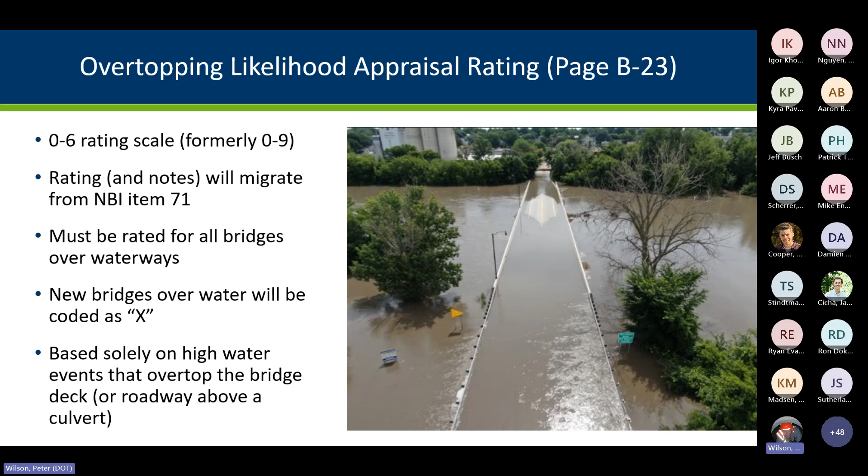And then moving on, in addition to the component and appraisal ratings, we also need to code 2 roadside hardware items during our inspections. The old NBI item 36, if you remember that one, 36A, B, C, and D, had 4 parts: railing, guardrail transitions, guardrail, and guardrail terminations. And those each had just 3 coding items: meets standards, does not meet standards, or not required.

With the new SNBI, there are only 2 items to code, the bridge railings and the bridge transitions, which would seem simple, except each of these 2 items has about 25 coding options. Federal Highway wants a specific crash test design standard and crash test level. Unfortunately, of course, in the SNBI, they provided no specific coding guidance for these items. So each state must develop their own coding system for these 2 items.

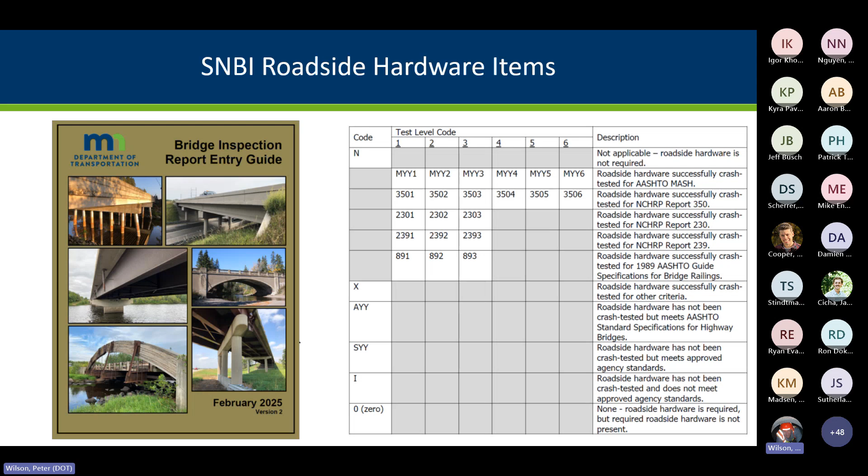This is ours. This is what we handed out at the seminars. We also have this in our BSIPM Chapter D. I imagine we'll probably be revising this a bit in the next 2 years as we get feedback and get new stuff in there, but this is what we have for now. So you'll use this one to code these 2 items.

Bridge railings, we narrowed down the coding options from 25 down to 11, and those are on page 42 of this SNBI, what we call the report entry guide. This item will be displayed on the routine inspection report entry form. But for now, inspectors cannot enter this code directly for bridges. You can for culverts, but not bridges.

So what we're going to do initially is code this item based on the MnDOT rail type code. And so what we want inspectors to do in the next couple of years is to verify the rail type that you have present on your bridge and make sure that coding is correct. And we'll go over that a little bit here.

The coding item, this is displayed on your inventory report. It's also in pages 11 to 41 of this entry guide. We've been using a numerical code to identify the left and right rail codes since the 70s. This has never been a federal item, so we've never really emphasized it much as a compliance item. So those codes are not always 100% accurate.

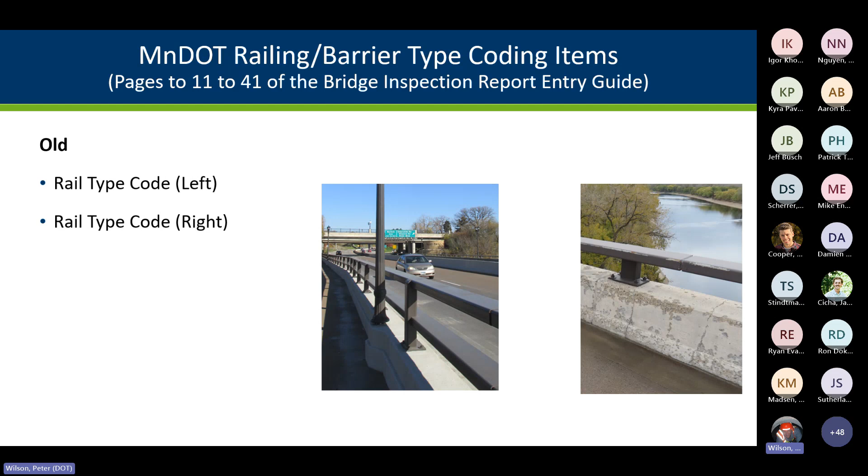One thing we have added this year: in the past, we just had a left and right. We've now added a new one for median. It might not impact you. You might not have a lot of bridges with a median, but if you do have a median, we now have a new item so you can code what type of barrier is present on that median.

Keep in mind that this is only for vehicular railings. We don't code the type of pedestrian railing they have out there. So again, only for vehicular bridges, vehicular railings, not for railroads or pedestrian bridges.

And in our manual here, our rail type codes are listed in two tables. The first is a smaller 2-page table that just lists the rail types by the code number. They're arranged just by the coding number. These numbers were assigned as new rail types were introduced or discovered. So they really came on board chronologically. So they're not grouped by any particular type or material. So it's kind of hard to find them. They're all over the place in there.

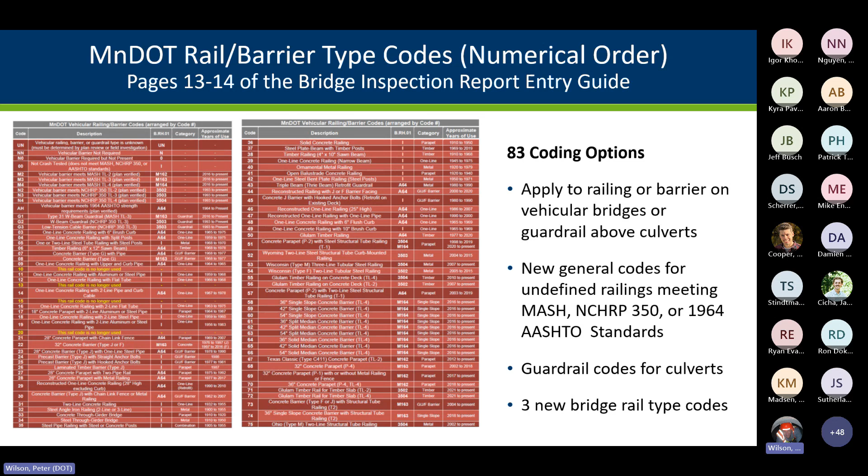And for 2025, we've added several new coding type options. We're now up to about 83 options that you can code these rail types.

The other table is arranged by material type to try to make it easier for inspectors to identify these in the field. So it's kind of by type and material. This table is going to be much longer and includes all the diagrams and descriptions of these. Some of the grouping types are: we have some new guardrail ones, we have single slope concrete barriers, which are kind of the new design, and we have the slightly older J and F concrete shaped barriers.

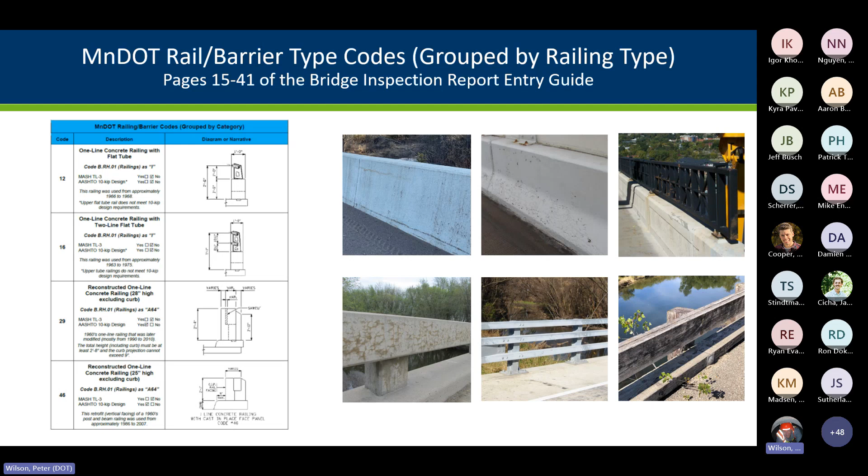We also have concrete parapet railings that have, say, a combination type railing. You can see there in the upper right-hand corner. We also have the older one-line railings, like in the bottom left-hand corner there. We also have metal railings and timber railings. So they're all kind of grouped by that. So when you see what type of railing you're on, you can hopefully better find what that code should be. We have revised many of these railing diagrams and descriptions.

We've added the range of years that each type was typically used in this state to help you identify those. It'll also identify what crash test level that railing should be coded as. Again, we'll be doing that automatically based on this coding, but at least it'll explain what that code is for each rail type. So if you have, for instance, a code 42 railing, we would code that as I, not crash tested, for that new roadside hardware item.

I'm using our timber rail types as an example of why our rail coding could be inconsistent. We have over 700 bridges in the state with timber railings, and we have 7 different rail type codes. The numerical order is all over the place because these were added through the years as new types were found. Some of these railings will meet the older NCHRP 350 crash standards. Some will meet the 1964 AASHTO strength requirements, and some will not meet any standard at all. We grouped them in the manual from new to old based on common years of usage.

For example, glulam rail beams, that's code 50. They came into use in the mid 70s. We have a lot of bridges coded as code 6, which is a sawn timber beam, that probably should be coded as 50. The plans will identify those glulam railings. In the field, you should also be able to tell the difference between a glulam and a solid sawn timber beam, like you see here. This is a glulam in the photo.

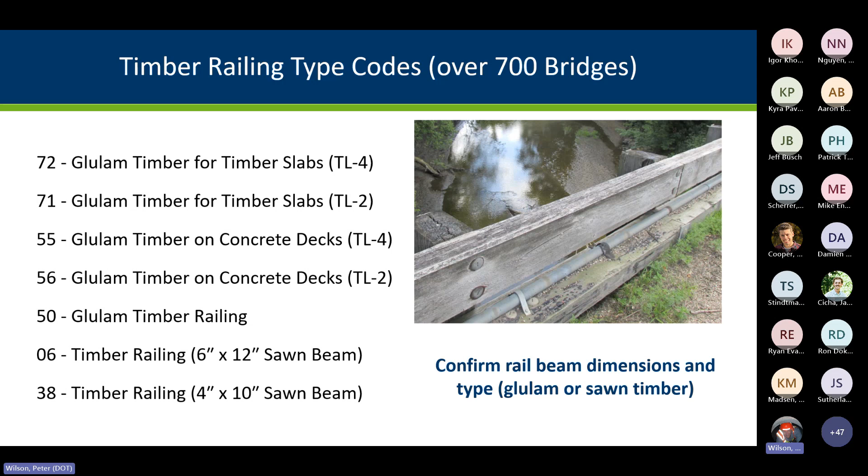For newer ones, one thing you can look at to identify these is the curb connection detail. When you see the type like here with 2 curb bolts on each side of the post, that will typically tell you it's a TL2 design. And if you see 3 curb bolts on each side, that's typically a TL4 design.

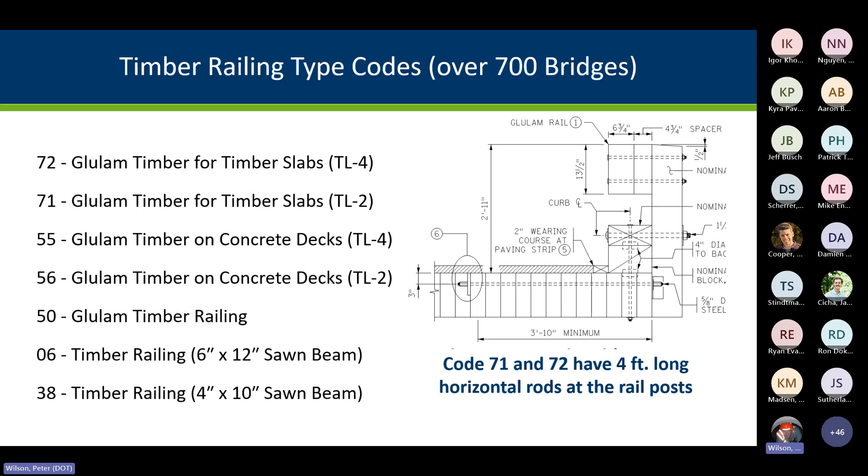The newest types, code 71 and 72, have a 4-foot horizontal rod anchored into the timber slab. There'll be 2 of these at each rail post. You can see these more in the plans, but if you look at the exterior, you'll see where the tops of those were anchored on each side of the post. So that's one way you can identify those newer 71 or 72 types.

Even with all these 80 plus rail type codes, inspectors, you're going to come across a lot of railings that don't match any specific diagram in this manual. We do have some general codes for those. We used to have some old MnDOT codes. Code 01 said meets standards for high speed, and 02 was meets standards for low speeds. We've had to eliminate those because they didn't provide a crash standard. They didn't specify material or configuration, so we couldn't migrate them.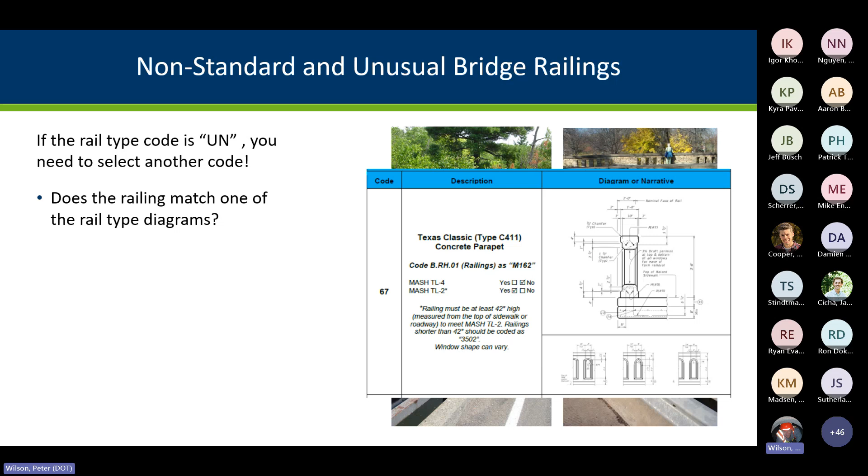So we've developed some new general codes, and all those have been migrated to code UN, which is unknown. So if you see a code UN on your bridge inventory sheet, you need to select another code. The first thing you want to do is check the rail type diagrams to see if it matches what you have there. If it does, enter that code for that particular railing. Another thing you could do is look at the plans to see if that railing meets some sort of crash test code. On newer bridges, it might say right on there it meets MASH TL2 or something like that.

We do have some general codes you could use there to code those. But for a lot of bridges, and this is probably going to be the majority of the ones you're going to see, they're not going to match anything in our manual. They're not going to meet any sort of crash test for you. You might not even have plans. So what we're going to see is a lot of these are going to have to be coded as type 00 in our system. And those will correlate with, I think, code I for that new roadside hardware item. But I think that'll be a popular code, that 00.

Also, a great idea to make sure you have photos of your railing entered in SIMS. That'll help us. If we have a question on it, we can see that photo and maybe code it for you.

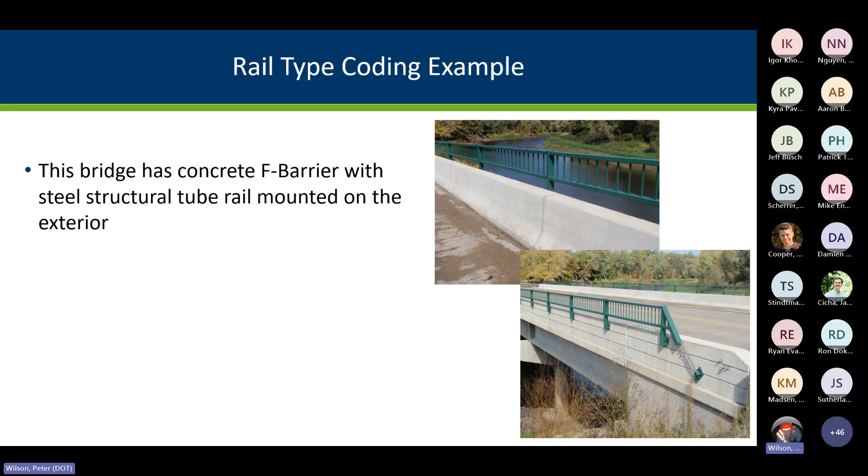Here's a rail type coding example. This is a bridge that was built probably about 15 or 20 years ago. It has concrete F barrier with what we call a steel structural tube mounted on the exterior of that. This particular type actually has two steel cables that run through that upper steel railing. It kind of adds some additional strength to it.

This was not a rail type code that we had in our system until recently. The rail type codes for G/J/F type barriers like this are on pages 21 to 24. We've recently added this rail type code 73 that describes this particular one. And again, we probably don't have hardly any bridges coded with this since this is a new rail type, but if you happen to have this present out there, that's the code you would use for that rail type.

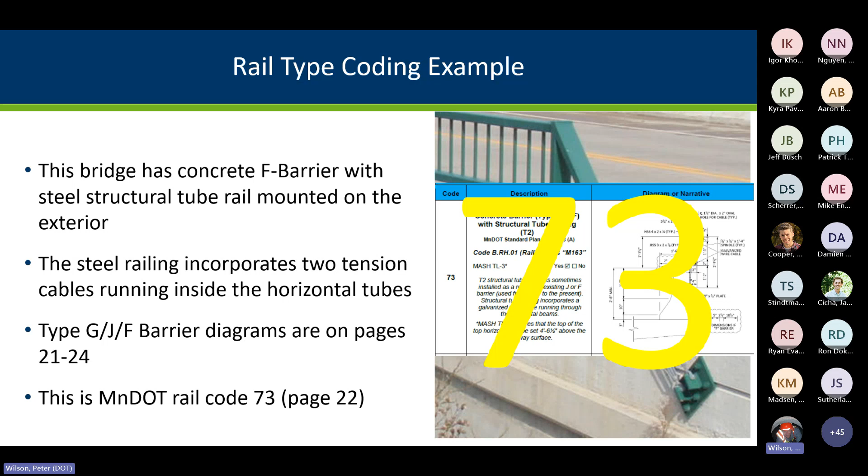And then the other SNBI item that we need to look at is BRH02, transitions. We have guidance for that on pages 42 to 46 of the coding guide. This replaces an older item, NBI 36, but there's no way for us to migrate that coding because it didn't give us enough detail in that old coding system. Also, we don't really have a transition type item like we do for railing, so inspectors are going to have to code this item directly.

We will bring in notes from both items 36B and 36C. So if you did have any notes describing why your transition was coded or what was coded, those will migrate over, and you can use that information to help you code this item.

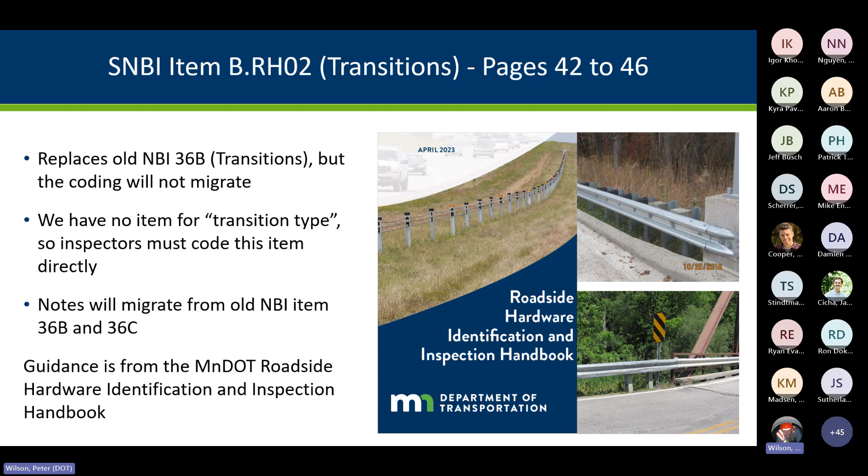None of us are really guardrail experts in our office. So what we did is we took this manual. This is called the MnDOT Roadside Hardware Identification and Inspection Handbook. It offers a lot of guidance. We basically took the information they had in there for guardrail transitions and put that right into our manual.

Again, this only applies to the roadway going over the bridge, not under the bridge. We're only coding the adequacy of the one above the bridge. There are a couple different things you'll run across. First off, you'll come out to a bridge and you'll have no approach guardrail. For that, it can only be one of 2 codes. It's either going to be coded as required but not present, or not required.

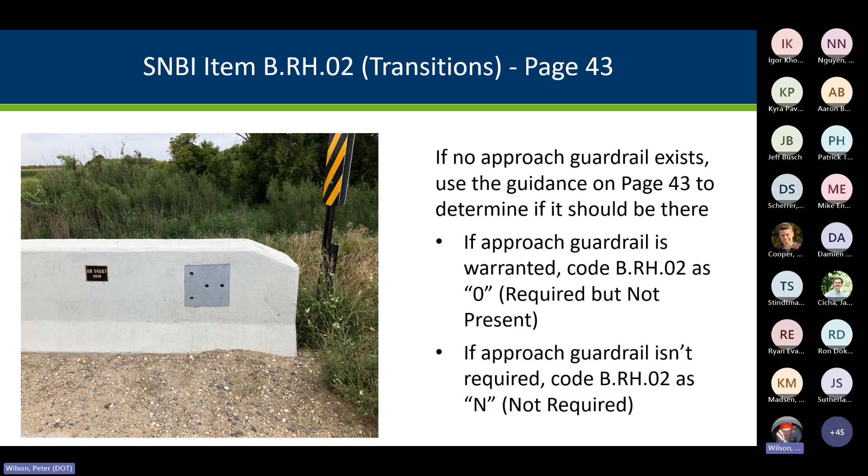To determine that, you first need to determine whether guardrail is required or not. We have some tables and guidance in there and in this system based on roadway speed, ADT, and deck width. If you've ever coded old item 36, you should be familiar with those, and you should have existing notes that, like I said, could migrate over and you could use.

So here's a coding example of a bridge. This is on a township road, constructed recently, about 2013. It's about a 55 mile speed limit, so high speed, but low ADT. The deck width is 28 and the approach roadway width is the same. Based on this, the criteria is on page 43. That's based on our Minnesota Rule 8820.

In this case, you must meet both of these bullet points in order for that bridge to require approach guardrail. The speed is over 40 miles an hour. It's 55, so it meets the first criteria. However, for the second criteria, it doesn't really meet either of those. The ADT is less than 400, and the deck width is the same width as the approach roadway. So in this case, approach guardrail would not be required, and the way we would code this one would be as N, not applicable, for BRH02.

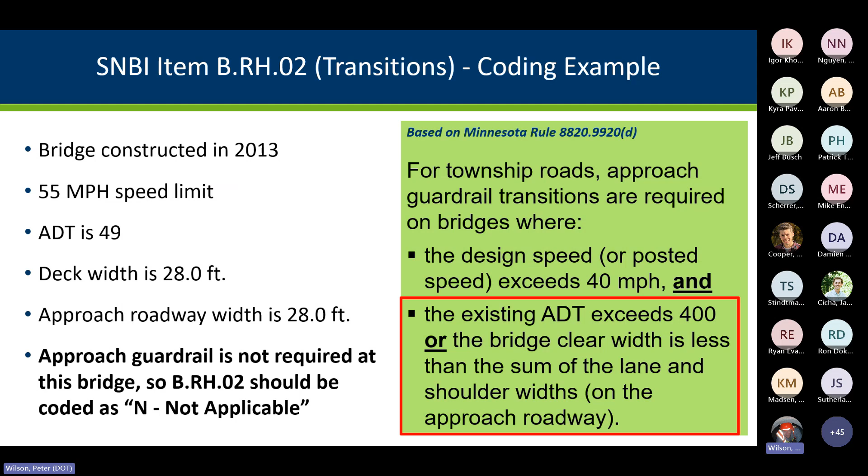Now the other, if approach guardrail is present, there are three coding options. There's a MASH option, there's an NCHRP, or there's does not meet standards, or not crash tested. As far as MASH guardrail, the guidance is on page 44. It should be pretty easy to identify these. For one thing, they're only going to be fairly new, installed from 2016 or later, typically.

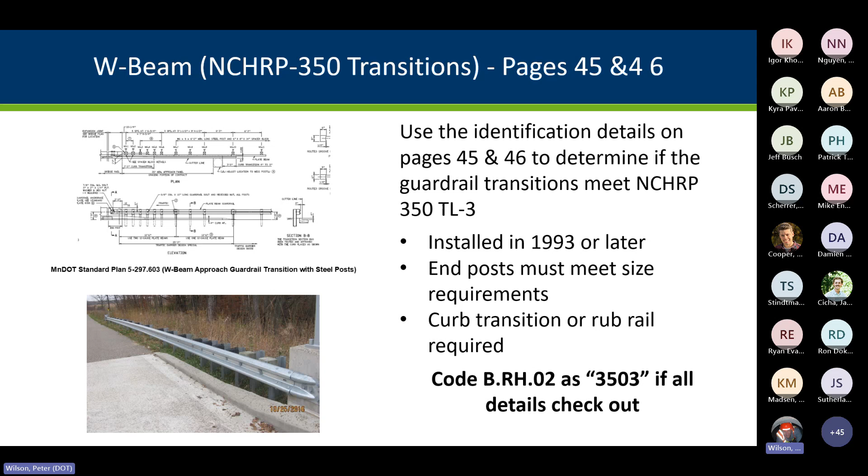The other more common guardrail type we'll see, especially on the local system, will be this NCHRP 350. Those are outlined on pages 45 and 46. So you'll code these and there's requirements in there for size of the end posts. You're going to need like a curb transition or rub rail below the plate beam. And if it does meet all those details on one of those two pages, you'll code this as 3503. The 350 is for the NCHRP 350, and the 3 is for crash level 3, which is what we design most guardrail to.

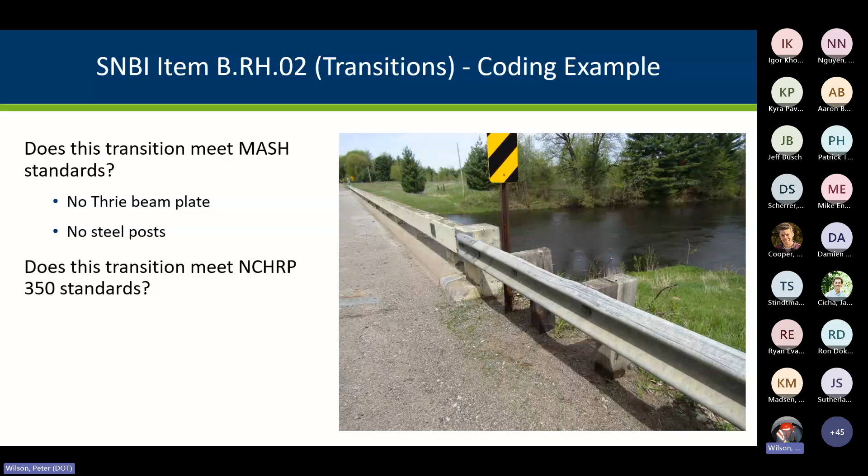So does it meet NCHRP 350? Well, it has a plate beam. It has timber posts, but there are a couple of things. First off, the end post is too small in this bridge, so it doesn't meet the end post requirements. Also, there's no rub rail or curb rail coming into this one, so again, does not meet NCHRP 350. So in this case, we're going to be coding that one as I, not crash tested.

And so just because we code it as I, there's no obligation to upgrade it. This is just the way we want it coded. It's not unless you were doing some sort of a roadway project that was using, say, federal or state aid funds, that at that point you might want to have that guardrail upgraded to the current standards. So, just that it's out there, you don't have to upgrade it automatically.

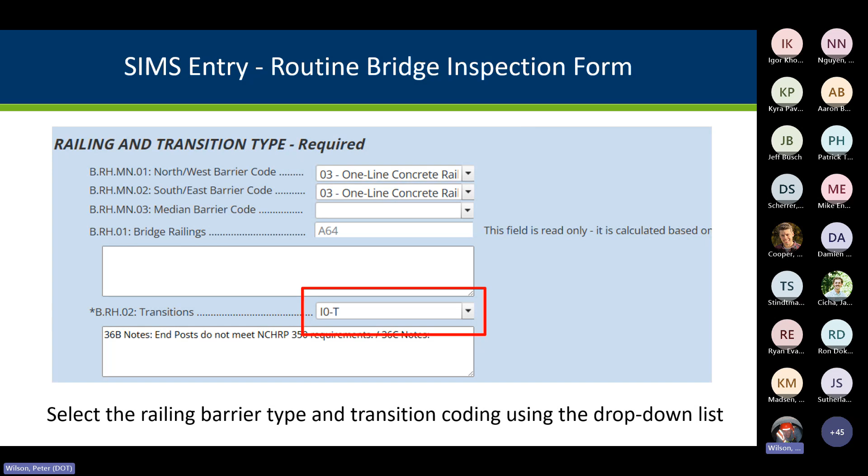Now, this is where those railing and transition type items are entered into SIMS in that report. In this case, this one has a transition code that you can see there, a temporary code I0-T for the transition. So in this case, you're going to have to select one of those other options depending on what you have there, either N not applicable or I present not crash tested, 0 not required. So you'll have to pick one of those upper codes for that item.

If any of you have started to do some entries in SIMS, you might have realized that we have this, what we call now the bar that has to go through, and maybe you've got some error messages back. One error message we are getting is this one right here. It says BC06 has a rating value, but BRH02 is coded N.

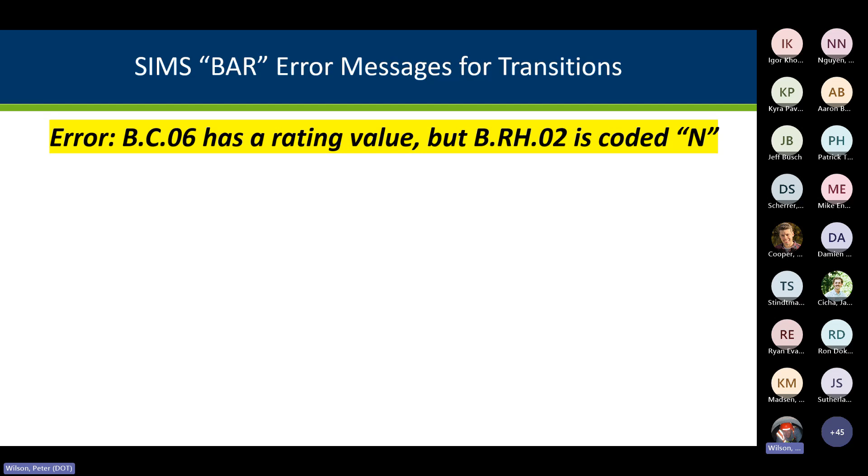This occurs when the inspector has rated the conditions of the transitions, that's BC06, but item BRH02 is coded to indicate there are no transitions. So one of those has to be incorrect, but we don't really know which one. Could be one or the other. Here's a first example where we got this coding message back.

This was an overpass bridge that has long approaches with retaining walls, and the bridge, approach and the retaining walls have the same railing, so it's kind of continuous across there and it continues quite a ways down on that long retaining wall. And in this case, the inspector rated that transition condition for BC06.

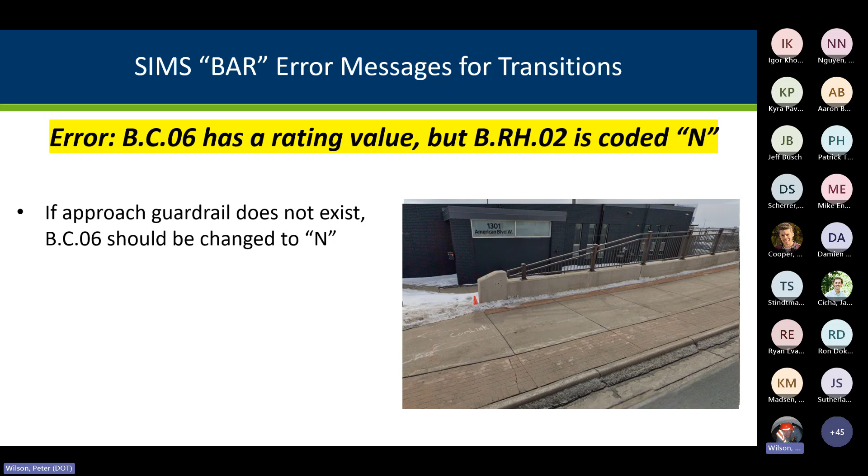Now looking at this one, where those terminate, you can see there's no approach guardrail where that railing terminates. In this case, it's a city street with a speed limit of 35 miles an hour. And actually, with those wide sidewalks, approach guardrail is not required for this bridge, and that's why it was never installed. I don't know why they have the holes there for it.

So for this one, to eliminate that error, you should not be rating the transitions on this bridge. There are no guardrail transitions. So that should be the way to eliminate that error, just by changing that BC06 from whatever they rated it, maybe it was a 7 or an 8, to N.

Now here's another bridge that had the same exact error, but it was kind of the opposite situation. This was an interesting, unique situation. A bridge had railings and a narrow sidewalk, and many years after the bridge was constructed, they built a new retrofit barrier between the roadway and the sidewalk. And at the end of that barrier, to protect it, they installed these crash cushions.

So in this case, the inspector had rated the condition of these transitions, but the roadside hardware item BRH02 was coded as N. A crash cushion basically serves the same purpose as an approach guardrail. And since approach guardrail exists, you should be coding it as to what it should meet.

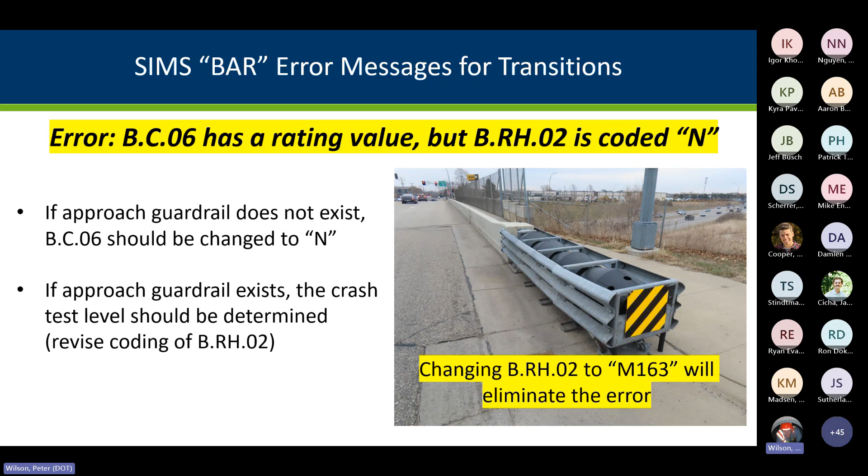If you do run across a crash cushion on one of these, you can let us know. You can maybe send us a photo of it. We can help you determine what the coding of that crash cushion should be. It's pretty rare. We don't see these on a lot of bridges, but in this case, we have it there.

So that was a lot to cover, and I apologize for that. If you do have any questions now, I could definitely try to answer. As you get out there and use these manuals, we appreciate any feedback we can get to try to improve them. I know we're going to make some revisions. We're already looking at the next couple of years, and we'll put the next field manual out probably two years from now. Any feedback we can get, we really appreciate.

Other than that, if you do have any questions on how you should be rating some of these items, please let us know. We're happy to help you out and try to clear up some coding problems. I'm sure we're going to have a lot of issues, especially with this new bar check in SIMS. It's a good way for us to also correct some problems and find some issues that we need to maybe provide better guidance for.